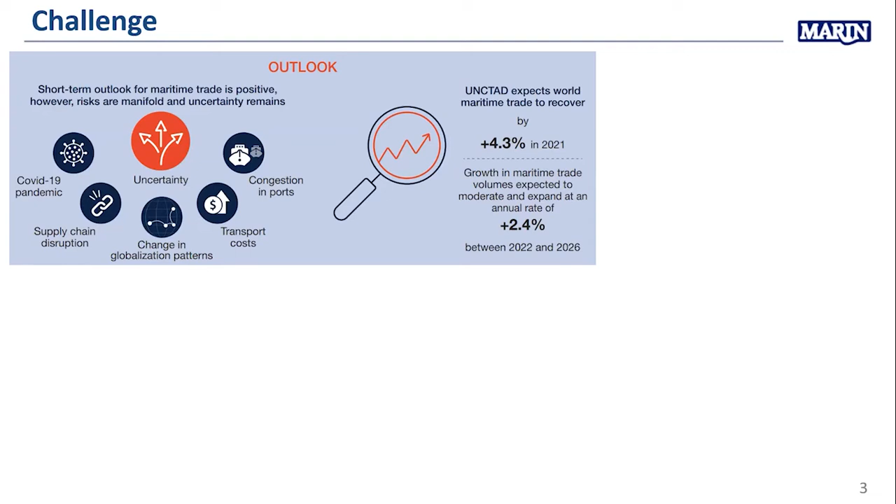And even now, in the latest report published by UNCTAD, we're talking about quite significant freight rates for containers and dry bulk. Obviously not that significant trade for the tanker, for oil, but for container ships and dry bulk, freight is actually coming up.

And at the same time, we remember the challenge about the environmental situation. We have a target from the International Maritime Organization to reduce our greenhouse gas emissions by 50%. That's in less than 30 years. So we should keep in mind that we do have pressure from the environment to do something to make our ships greener, more efficient, and so on.

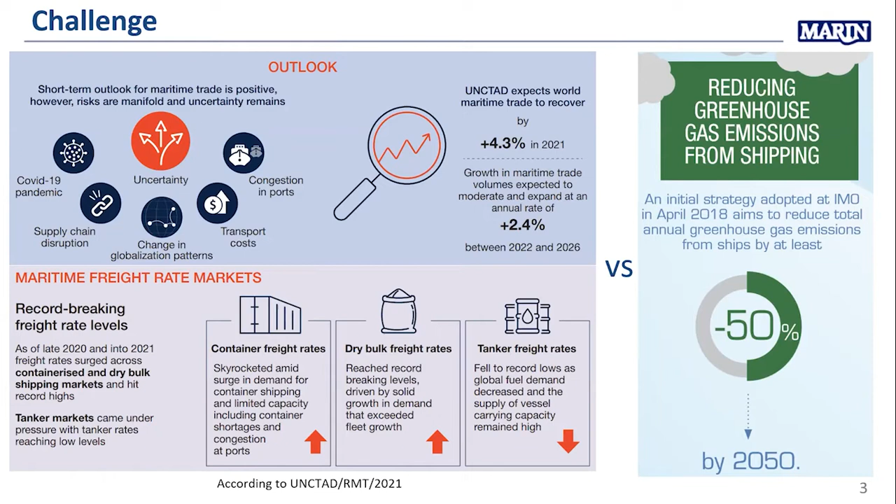This message was also conveyed in the latest ITTC meeting, held in Wuxi, not far from Shanghai, in 2017. Even though the ITTC is a Towing Tank Conference, where model test facilities come together to discuss physical towing tank representations, even in that environment they outlined that they need advanced CFD plus full-scale data in order to make our procedures and recommendations for better ships more and more reliable.

There is development in this area. Just last year, finally, the International Maritime Organization accepted CFD as an alternative to model tests for EEXI calculations. Up until last year, the only measure for efficiency at the pre-design stage was model tests. Everyone knew about CFD, a lot of people relied on it, a lot of people were fascinated by it, but it was not an industry-recognized tool. Now, from last year, we are talking about towing tank and/or numerical calculations. This is a very important step forward.

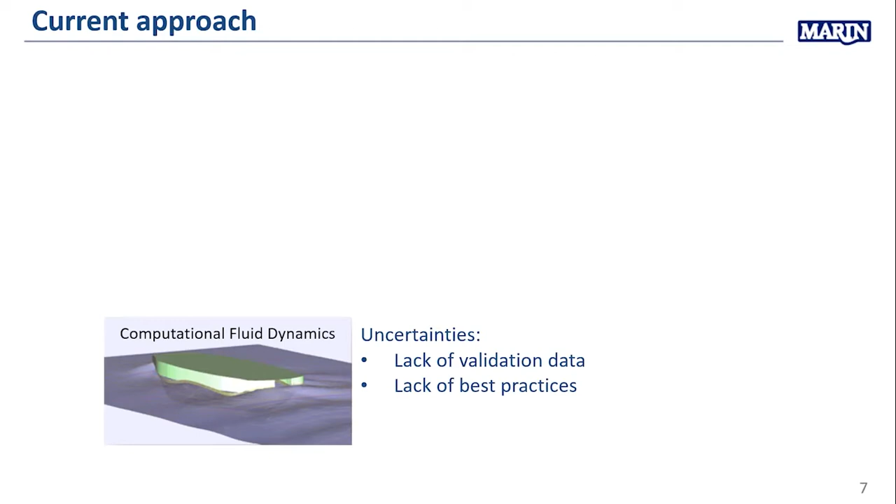Once you do the model test - so usually how it's done - out of the CFD we derive the best possible shape, and we still do the model test for this shape, the more traditional approach of CFD validation. But again, in model test, there are quite a lot of uncertainties.

The scale effect, obviously - you cannot satisfy the Froude number and Reynolds number at the same time. The correlation allowance - every research facility globally uses their own coefficient in order to scale up their model test data.

Another challenge is energy saving devices. Those correlation allowance coefficients mostly work okay-ish for traditional hull forms, but if there is something very unconventional - an energy saving device or weird hull form - those coefficients are actually challenged, and in that case they might not work well for some cases.

And finally, once the vessel is built and we do the full-scale trials, it's still quite a lot of questions - sea state estimation, draft mark readings, hull roughness estimation - not so many people doing that properly. And at the end we still get only one curve, which is the speed and power curve.

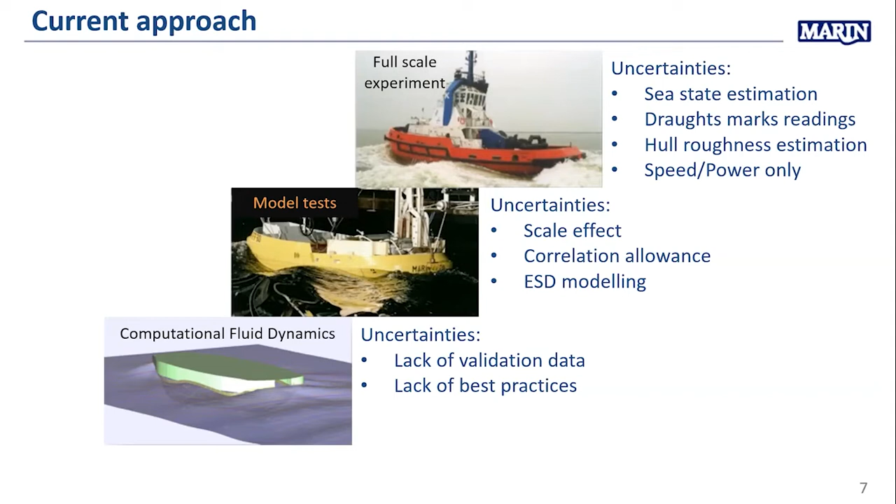So basically we're judging the performance based on only one parameter, which is power. And in power, everything is there - hull efficiency, propeller efficiency, everything is in one single parameter. So this is the technique we are doing now, but at the same time there is some sort of detachment from each other - there's no proper global feedback loop to make this work well.

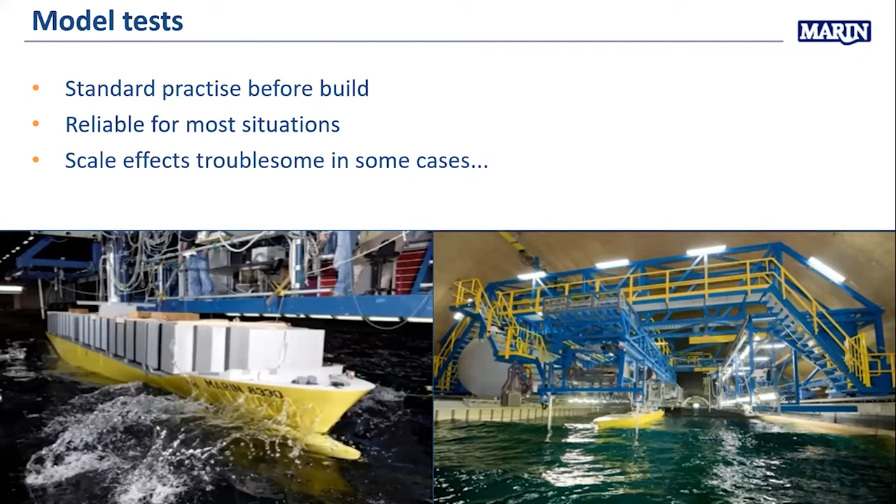Just a couple of slides about the model test, so you know how it actually operates. We build the model of the actual vessel, usually about 6 meters long, this kind of size, and we run this in the towing tanks.

Physical tests - to me, personally, when I was working at Lloyd's Register before and did quite a few sea trials myself, I thought that you can understand the performance of the vessel once you are staying on the deck, or in the engine room, or on the bridge of this vessel. However, there's still quite a lot of uncertainties, and the key ones are winds, waves, current, and so on.

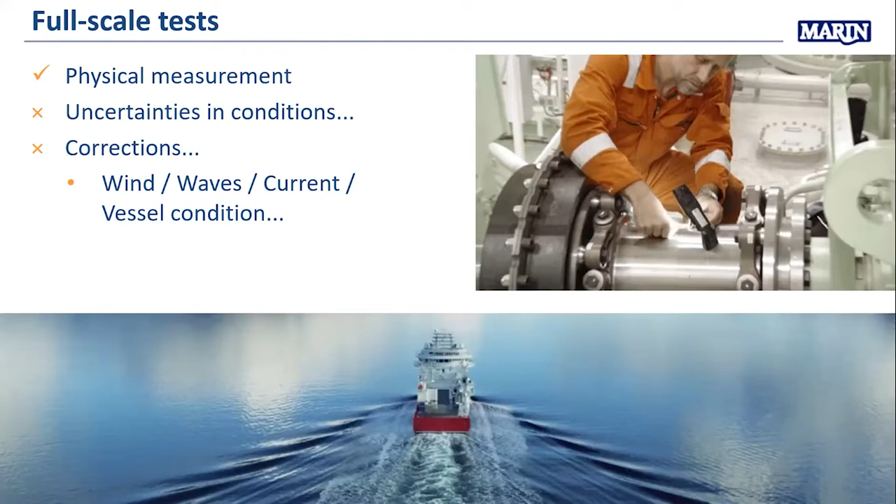Sometimes you're expecting the weather condition would be like that for your trials, and you end up with different conditions. But because the time is allocated for the trials, you have to perform them in that condition. And obviously, your prediction might not be very accurate at all if it's in these conditions.

So there is an industry recognized procedure for the sea trials, ISO 15016. We have to follow this procedure in order to make our trials as accurate as possible.

However, in this procedure there are some interesting bits. The wind and waves can be determined by visual observation from multiple experienced mariners. So if 5 people stay on deck, all 5 of us can check the wave height, and one person says 1 meter, another says 2 meters, a third says 3 meters, but we have to use a single value. Which one? No one knows.

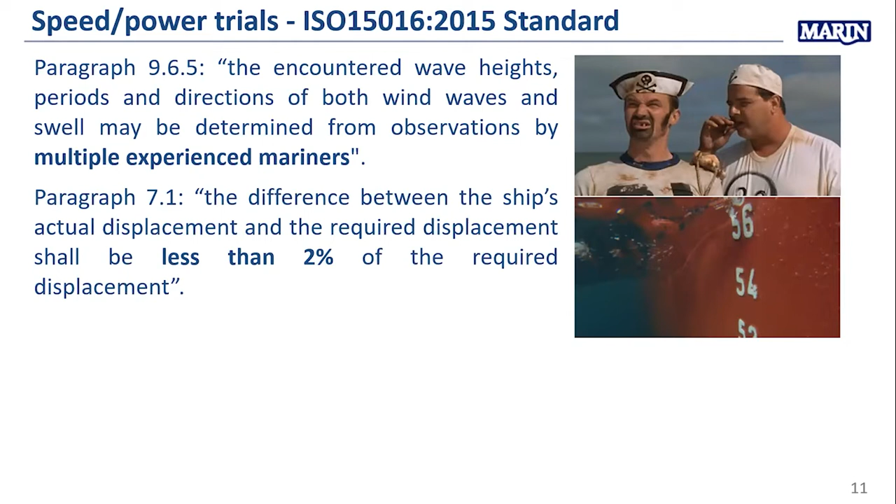Depending on which wave height you put in the spreadsheet, your curve will be different. The second point: the difference between ship displacement should be less than 2%. However, if you're talking about a very large crude carrier or tanker, that 2% is quite a significant displacement. Just talking about resistance, it will give you some deviation on the resistance. Again, it's quite an uncertainty.

And another paragraph, 7.3: if there is roughness, you have to clean the hull as needed. What does that mean, as needed? If I, as a superintendent, see this kind of condition on the hull and say it's fine, it should be all right. However, obviously the resistance of the vessel will be quite significant, right?

So there's a lot of subjective meaning and subjective discussion happening in this procedure, and we have to deal with this somehow. Specifically for EEDI or EEXI, it might be identical vessels, sister ships, built by the same shipyard, but because of these factors the speed power curves will be very different. Which doesn't make sense, because the owner might ask, hold on, I have 2 identical sister ships, how come I have 2 different performance characteristics of them? Doesn't make sense.

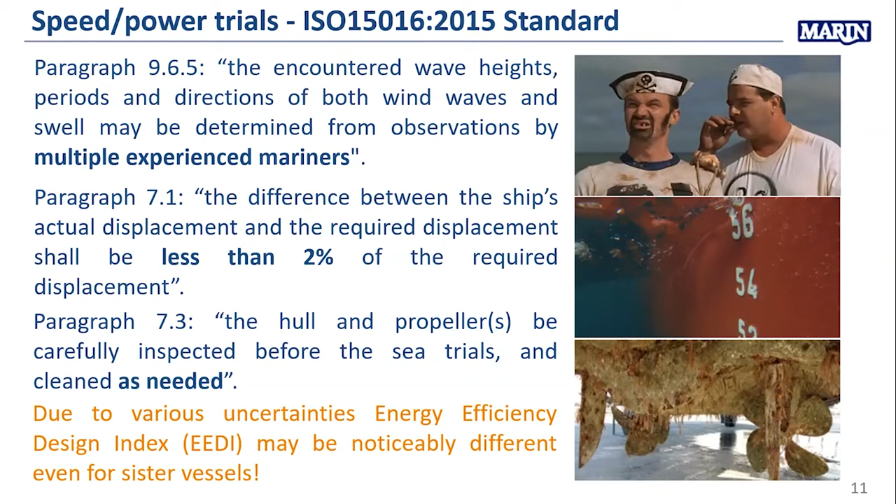CFD - that's probably the only slide I have about CFD. Obviously it's a very good tool, it can offer both scales, and we can dive into what's happening with the flow and so on. But again, for validation, the only data we mostly have is from model tests, which don't take into account the scale effect. So we don't have enough data for full scale validation, and that's the challenge.

This is probably the only publicly available curve at the moment. In 2016 we ran a workshop at Lloyd's Register and asked participants to blindly submit results for the actual ship. It was a general cargo vessel, and the participants did the calculations blindly. Then we came together in a rainy day in Southampton in November 2016 and discussed the results.

You see quite a lot of participants under-predicted the curve, the orange curve, which was actually from the trials. However, some of them were just spot on. So it means there is an opportunity, a possibility to predict the performance accurately if you have the experience and knowledge. That was one of the key outcomes of that workshop.

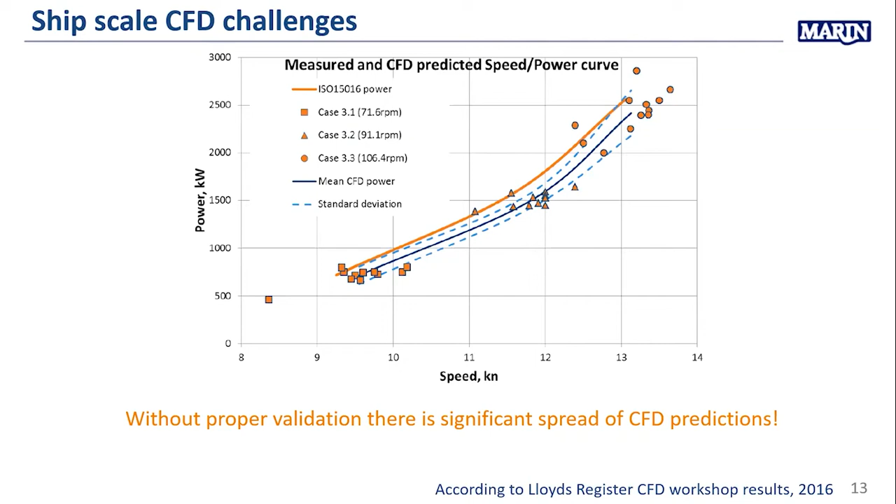Having this in mind, we are working on a global initiative called the JoRes Joint Research Project. This is the largest joint industry project ever run by Marin, the research institute in the Netherlands. Normally a joint industry project has about 15 to 20 participants; here we have more than 40. I'll show you this slide in a minute.

The key point is this project is supported by IMO, the International Maritime Organization, because they said we do need reference cases in order to validate our CFD. For this project we have 3 vessels.

One is already famous, the same vessel we used in the workshop in 2016, the MV Regal, but now we have a quite different set of results, like different measurements, new technologies, and so on. The 2 other vessels are a single screw tanker and a twin screw vessel. The more vessels we have, the better variety of data, and so the better our predictions and validation data will be.

This is the list of participants we have at the moment, and I think it's a very good bunch of companies. You can see there are key shipyards like Samsung, Damen, Hyundai, DSME; research institutes like Marin, HSVA, SSPA; propeller designers like Nakashima; and class societies like Bureau Veritas, Lloyd's Register, and so on. This is exactly what we wanted to bring - different stakeholders with different backgrounds and different ideas, sitting together and developing the benchmarks for future CFD.

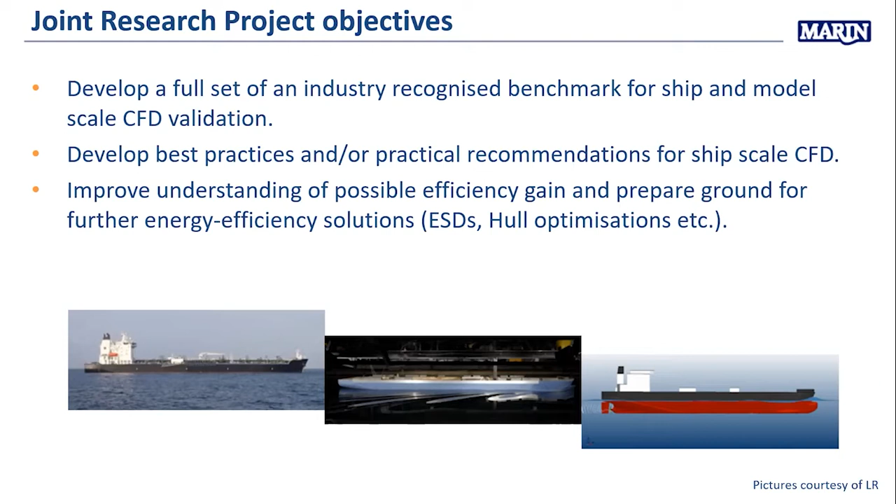That's kind of the message being discussed now at different levels of the maritime business. I don't have too much time to discuss all aspects in detail, but I would like to highlight key points on why this project is very unusual - very different to other projects.

We do 3D laser scans of all our vessels. You might ask why - because usually as designers we do have geometry, right? We have the CAD files, developed in Rhino or whatever, for the propellers, for hulls. So why do you need to spend time and money to do the 3D laser scan?

As you know, they are different. When you order this at Korean shipyards, there are some deviations with the hull, and it might be - I wouldn't say half a meter, but it could be quite a significant deviation. That's why we have to make sure we are calculating the actual vessel that was tested in the trials, with no deviation in the geometry. That's why we do the 3D laser scan for all our vessels.

Roughness - sorry, I'm just holding the microphone, so maybe it was trouble for the online speakers. To be honest, we might open the Pandora's box with roughness, because once you're doing your validation and model tests against Kriso container ship, KVLCC tanker, model test propellers, you don't actually think or care about roughness, because you're just assuming the object, your model, is hydrodynamically smooth.

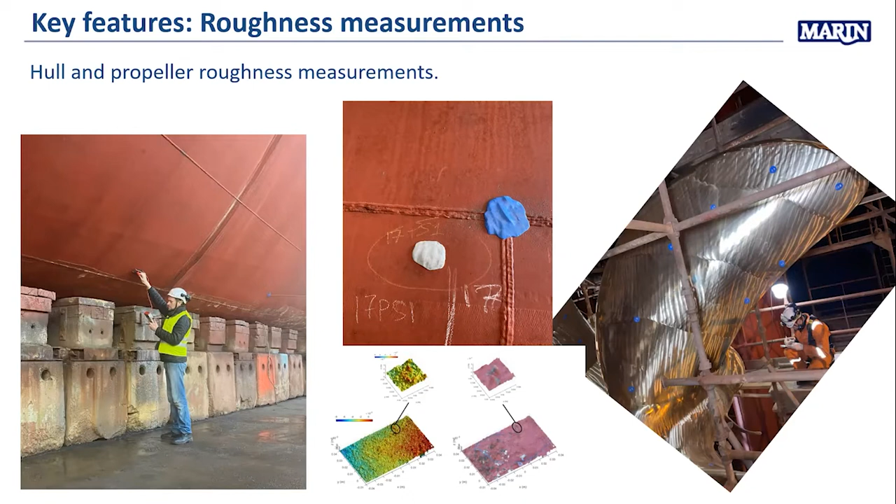Model test. As usually mentioned, the traditional approach is to do the model test first, and then the vessel is built. What typically happens is you do your model test at the conditions you think, draft, speeds, geometry, and so on. But during construction, the vessel might be slightly different and conditions will be different.

And what we see is the trials conditions are never the same as the model test conditions, different drafts, different speeds, and so on. So in this project, we start with the actual trials first. We know exactly the conditions of draft, speeds, everything. Then we replicate these conditions in the towing tanks. And for the towing tank, we don't use the design geometry, we use the 3D laser scan geometry, so it's reverse engineering. We're doing the model tests after the actual trials in order to match and learn more about the scaling effect.

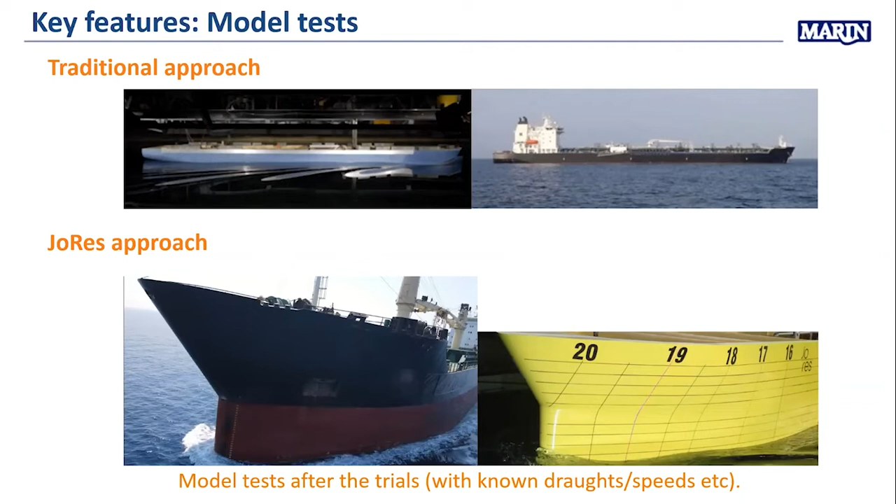Propeller thrust. I mentioned earlier that at the moment the only parameter we're working with is power and propeller torque, which includes hull efficiency, propeller efficiency, everything. In order to find out the difference between them, you have to measure propeller thrust, which is quite tricky because the compression of the shaft line is very minor, like a few microns. You have to determine this in a noisy, highly vibrating engine room.

We're working together with VAF Instruments who developed this TT Sense, and this was applied on a few vessels in our project to measure propeller thrust. Just a fun fact, the accuracy of the sensor is 25 nanometers, equal to 5 seconds of hair growth. So if you count 1, 2, 3, 4, 5, your hair will grow about 25 nanometers, which is the accuracy of the sensor.

Trials. I mentioned the ISO 15016 standard, an industry recognized standard, but still quite vague. Here we do more, because for our purposes, for CFD validation, we need to be on the safe side. We need to look deeper with a higher level of accuracy, specifically selecting very good weather conditions, making sure there are no waves, no significant winds, and so on.

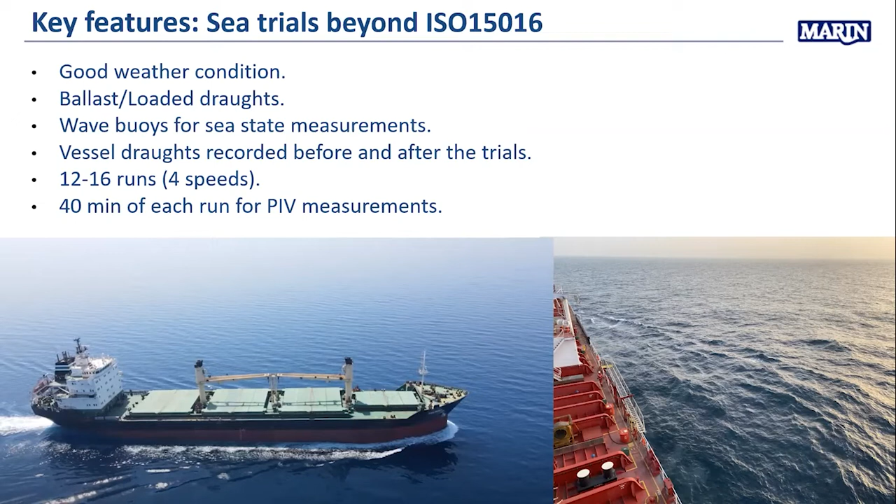We usually do quite a lot of runs, because according to the ISO standard it should be 3-4 reciprocal runs, so about 8. We usually do either 12 or 16 to increase confidence in our runs. And once we do the PIV measurements, we increase the duration further. Usually according to standard it should be 10 minutes, we do it for 40 minutes. Have you heard about PIV?

Particle image velocimetry. So basically, apart from measuring propeller torque, which gives us power, we would like to know what's actually happening next to the propeller, what kind of flow, and how this flow interacts with the propeller and the hull. To do that, we developed a special tool.

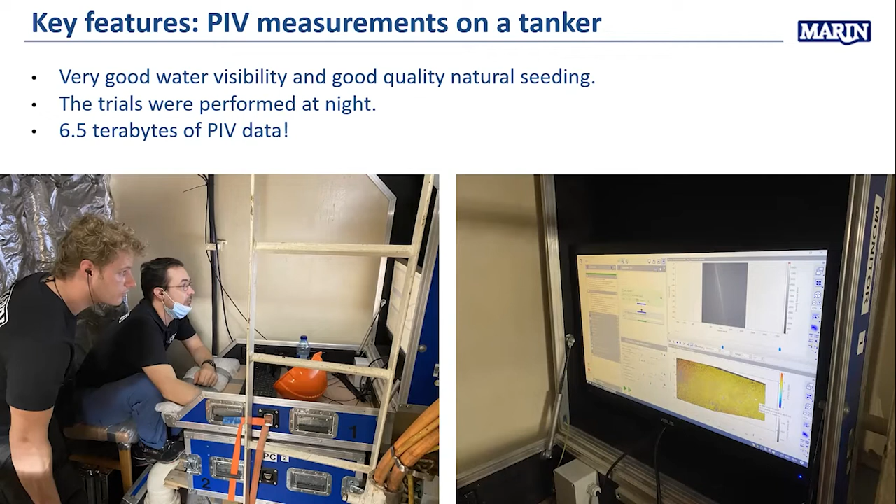Then there's the CFD part. Mark and Hrvoje were involved in this, and I really appreciate their contribution. We're doing quite a lot of interesting studies with CFD, about grid-dependent studies, thrust validation, and roughness analysis. So it's quite a lot happening in this area as well.

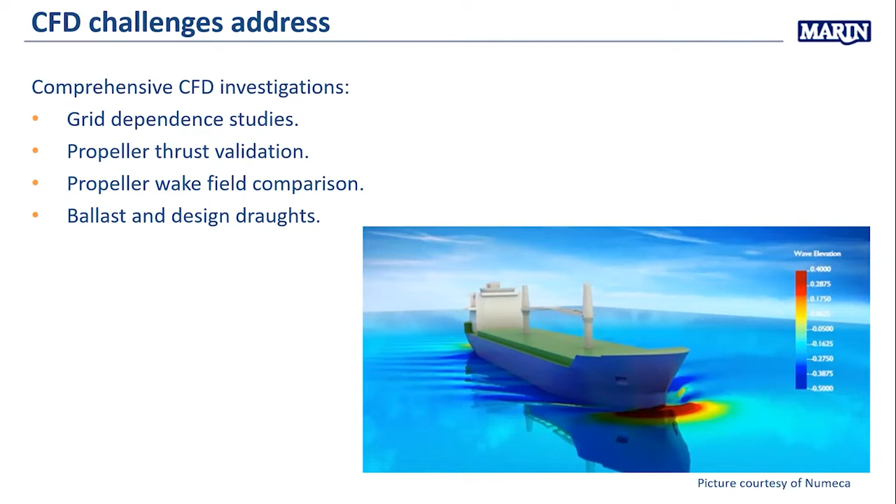So the key message — if you go outside and later someone asks what's the key message of this presentation, what did you learn — the key message is like that.

Once you do the model tests, in this project we do the model test after the trial, so we do the reverse engineering, and we do it in different facilities. If someone is doing something wrong, we don't repeat this error again, because we do it in different facilities. One model test was in Norway, another was in China, with the same model by the way.

For CFD, we have the validation data development, and we're developing the best practices for how to run CFD with the highest possible standard.

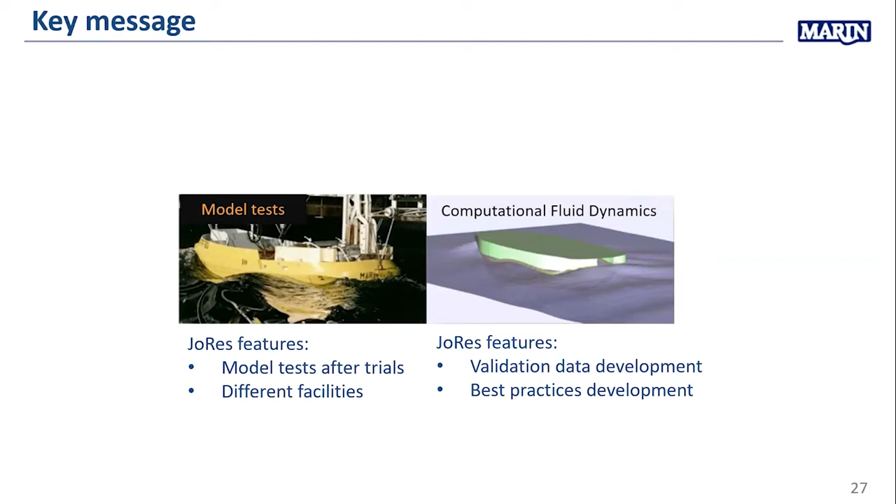And for full-scale experiments, we have sea-state assessment with a buoy, accurate draft measurements, thrust measurements of the actual vessels, and PIV measurements of the flow. Most importantly, this is looped — we do this for the same geometry, the same conditions. So now you have the opportunity to cross-check and learn, because unfortunately none of these methods are 100% accurate. You have to fuse all of them in order to better understand the reality.

And the concluding remarks: here we're doing industry-recognized benchmarks for CFD validation. That's probably why it's important for this audience, because we need the real data — the actual roughness data, the actual measurements of the vessel, on the vessel, from the vessel — in order to validate our CFD. This creates the opportunity to learn more about energy efficiency. Maybe with this kind of validation data set, in a few years we develop a completely new hull form, or a new propeller, or an energy-saving device which gives quite a good gain for energy efficiency.

Just one example: in 2015, a group of researchers from GL — the German class society, well now it's the Norwegian-German class society — made an interesting study. They took an initial hull form and used artificial intelligence to run an optimization process for the hull form, for I think a few specific speeds. They ran 37,000 iterations, considering 37,000 hull forms in order to get the best result, and ended up with a final hull geometry.

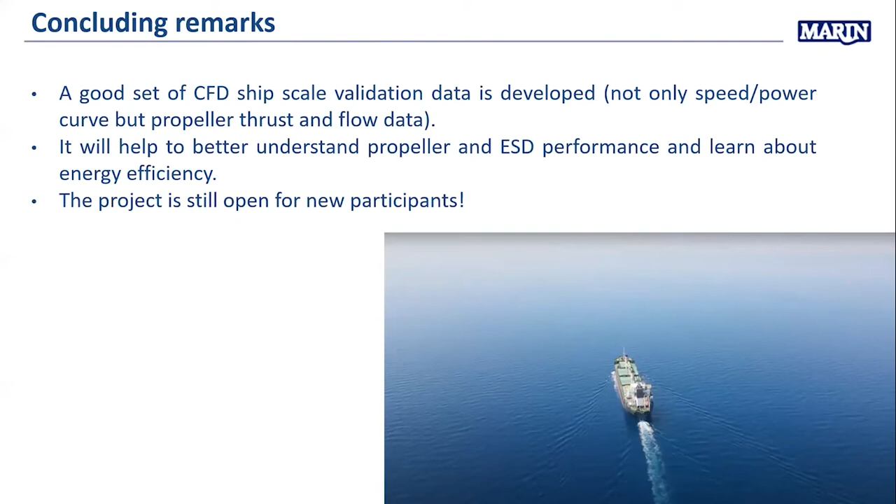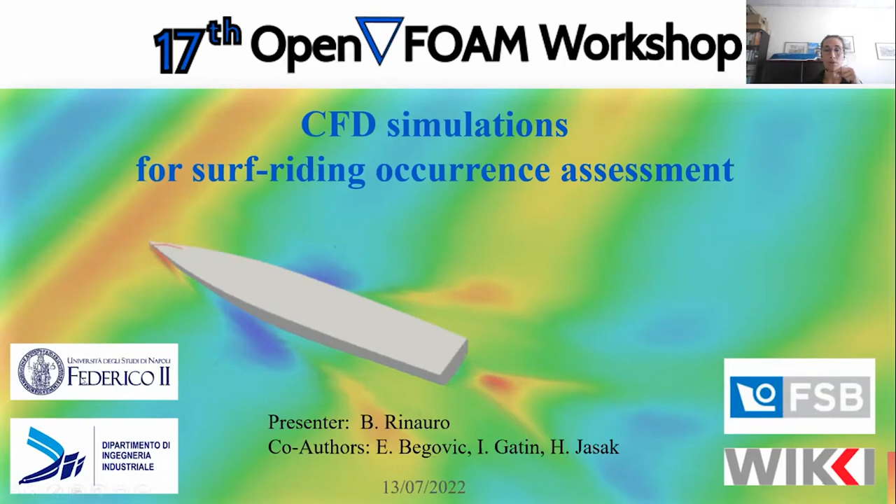I will first describe the physics of the phenomena, which has been studied first with a one-DOF mathematical model. Then I will describe the set of CFD simulations, concluding with results and discussion.

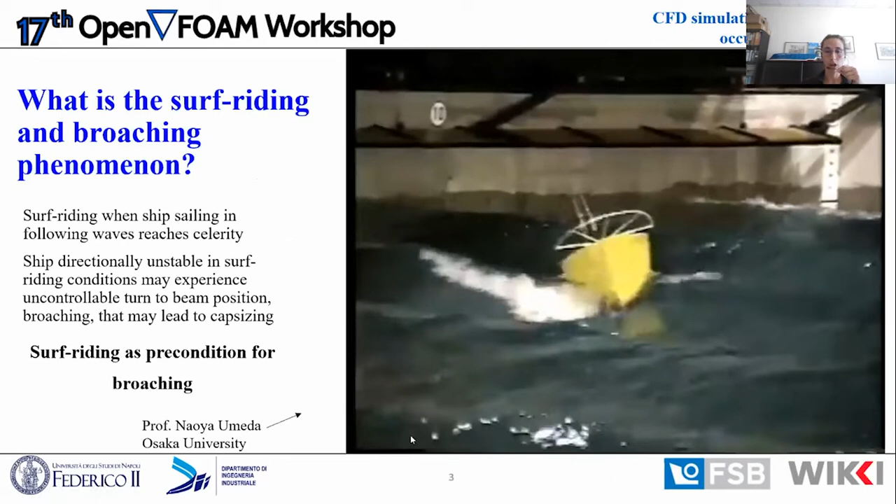So what is surf riding and broaching phenomena? Surf riding occurs when a ship is sailing in following to quartering waves, with ship speed lower than wave celerity. In this condition, the ship may be caught by the wave and start sailing with the same speed as wave celerity. In this condition, surf riding equilibrium occurs.

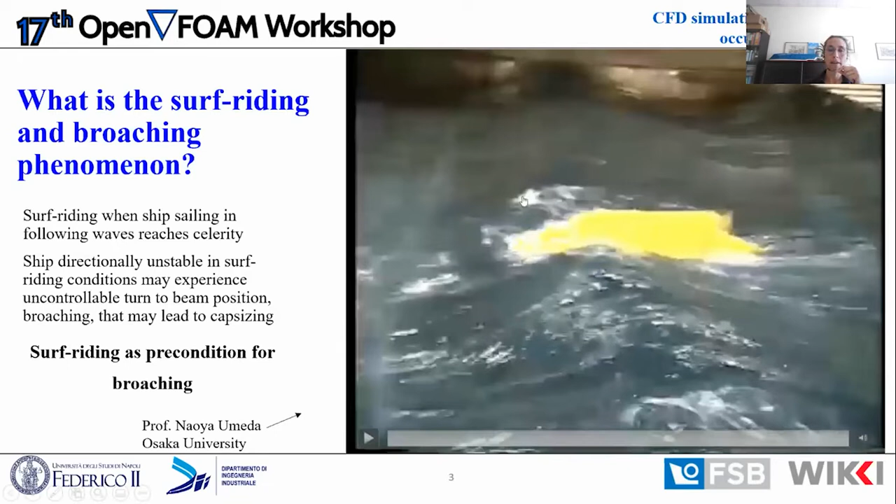In this condition, the ship is directionally unstable, and an uncontrollable turn to beam position may occur, which is called broaching, which may lead to capsize. Since surf riding is a precondition for broaching, which has more complex dynamics, surf riding study is used to detect broaching vulnerability.

The physical phenomena of surf riding can first be schematized with a one-DOF surge motion equation in regular waves. The equation considers the equilibrium of the forces acting on the ship in the forward speed direction. The forces are the resistance, the thrust, and the wave force.

The surf riding equilibrium is reached when the difference between the resistance and thrust reaches equilibrium with the wave surging force. The resistance and thrust is represented by the green curve, while the wave surging force is represented by the red sinusoidal curve.

During the surf riding equilibrium, two types of equilibrium may exist: stable equilibrium when the wave trough is at midship, and unstable equilibrium when the wave crest is at midship.

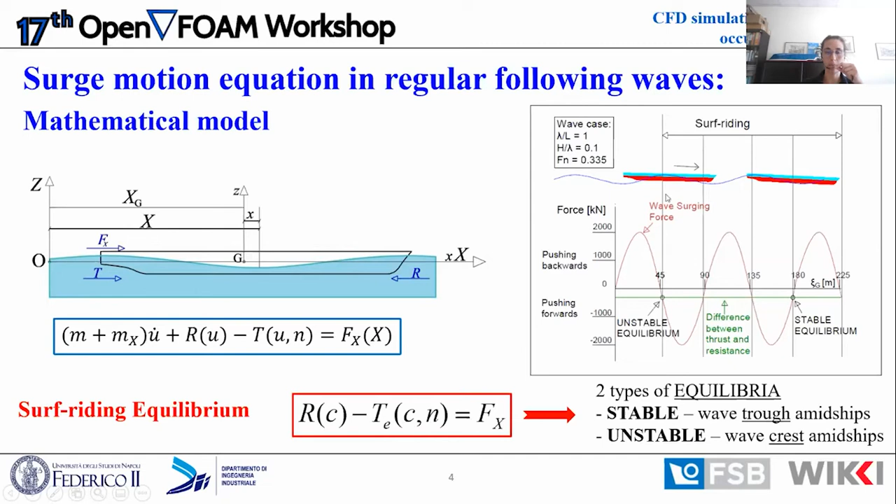The solution for surge displacement and surge velocity made it possible to create a phase plane representation, along with the calculation of the stable manifolds.

Two conditions have been identified. The first is when surf riding is between the first and second threshold. In this case, depending on initial conditions, both surging or surf riding motions are possible, and the surf riding motions are delimited in the domain defined by the stable manifolds.

The second condition is surf riding over the second threshold. In this case, whatever the initial condition, the only possible motion is the surf riding equilibrium.

The change in system behavior in this case has been obtained by increasing the wave height, but other control parameters to observe the system behavior changing are the propeller number of revolutions and the wavelength.

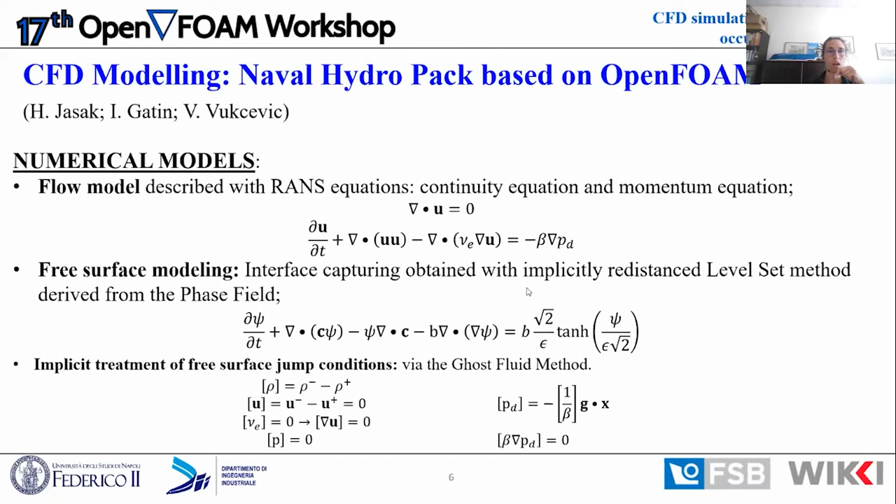The wave modeling is obtained through a double decomposition: a solution decomposition achieved via SWENSE method, which decomposes the wave field into incident and perturbated components, and a domain decomposition achieved via relaxation zone, an implicit approach which forces the generated perturbated field to vanish in the far field boundaries.

The partial nonlinear differential equations are discretized by the finite volume method in two steps: a solution domain discretization divided in time and in space, and an equation discretization which requires that the governing equations in integral form are satisfied over the control volume around a center point.

Finally, the turbulence closure is achieved via two equation eddy viscosity models described as the K-omega shear stress transport model.

Together with the numerical models, the physical models were the hydromechanic couplings, which combines the fluid dynamics and mechanical rigid body motion. The wave field was described by the linear wave theory, since only regular waves were simulated.

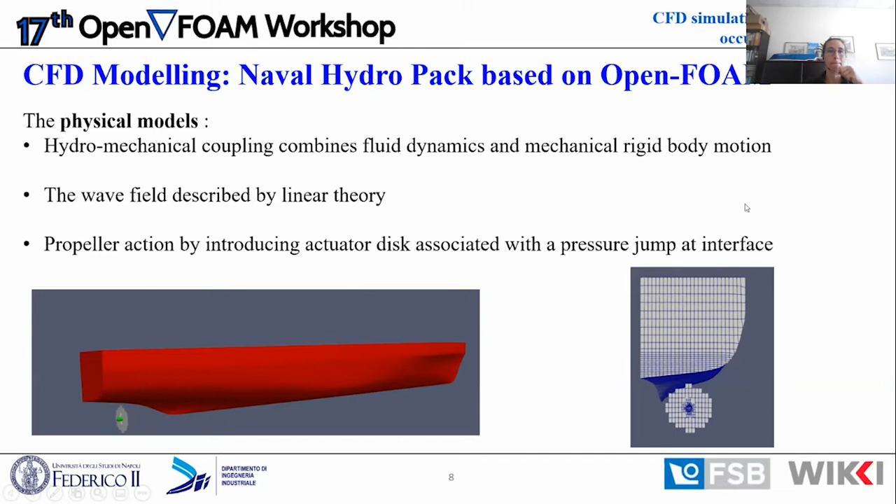Surf-riding occurrence has been studied for this parent hull of the systematic series D by Kracht and Jacobsen. The CFD simulations have been carried out at full scale, and the hull was scaled at 90 meters length.

The simulations were carried out considering only half of the domain, since the motion is symmetrical.

The first set of simulations were carried out in calm water self-propulsion conditions in order to validate the setup of the simulations. Therefore, the ship was free to heave and pitch, and resistance and thrust values were analyzed and compared with experimental data available.

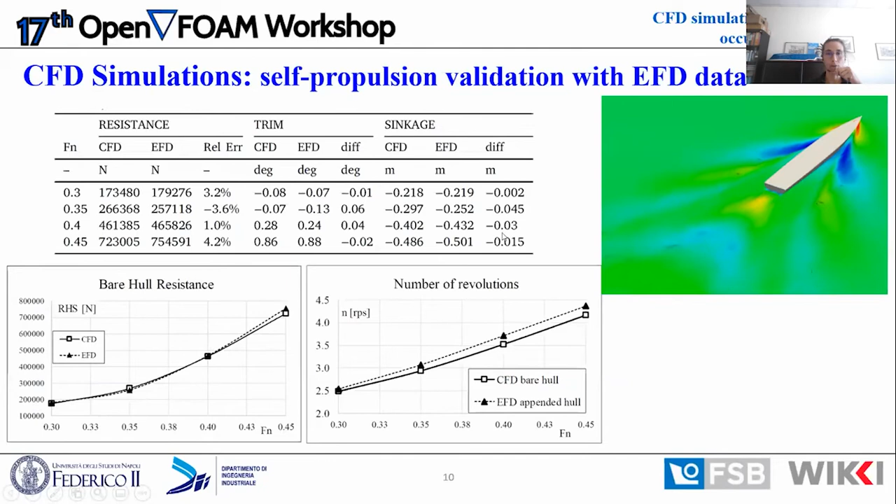From the graphs, we can see that the two approaches are in good agreement. Therefore, once the setup was validated, simulations in regular following waves were performed.

Although CFD simulations are time-consuming, especially in surf-riding conditions when the encounter periods are very long since encounter frequency tends to zero, the advantage of CFD simulation is that the physical phenomena can be studied with great precision and analyzed in different aspects.

In fact, to observe and identify the surf-riding equilibrium, we used different approaches. The first approach was to identify and observe the motion of the ship in waves.

In this case, simulations were run with 3 degrees of freedom. The ship was free to surge, heave, and pitch.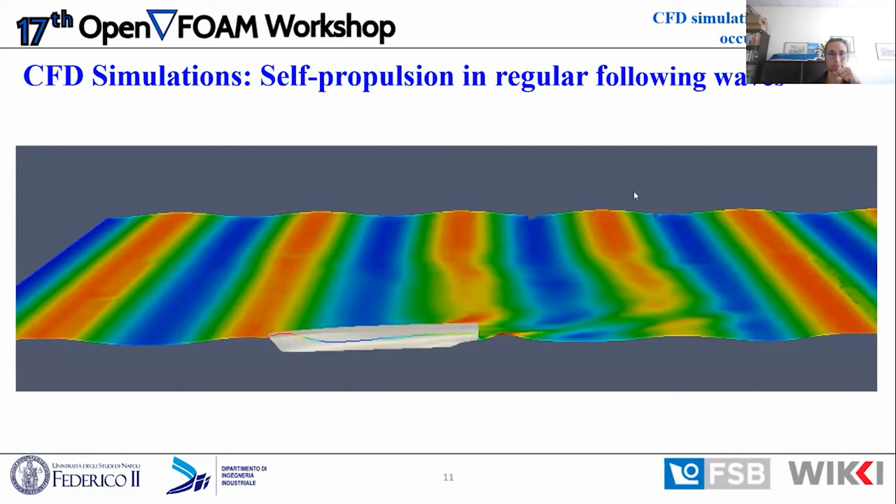Another approach to identify surf-riding equilibrium was through the study of the tendency of the velocity. If the ship speed, the blue line, oscillated in time, surging condition was identified. When the ship speed reached the wave celerity and continued with the same value, surf-riding equilibrium was observed.

Another approach was analyzing the phase plane. In fact, in surf-riding equilibrium, we can see that the phase plane trajectories tend to a fixed point.

Moreover, through the analysis of the variation of the forces, we could identify surge motion when the forces oscillated in time, and surf-riding equilibrium when the force reached a constant value and went to the equilibrium.

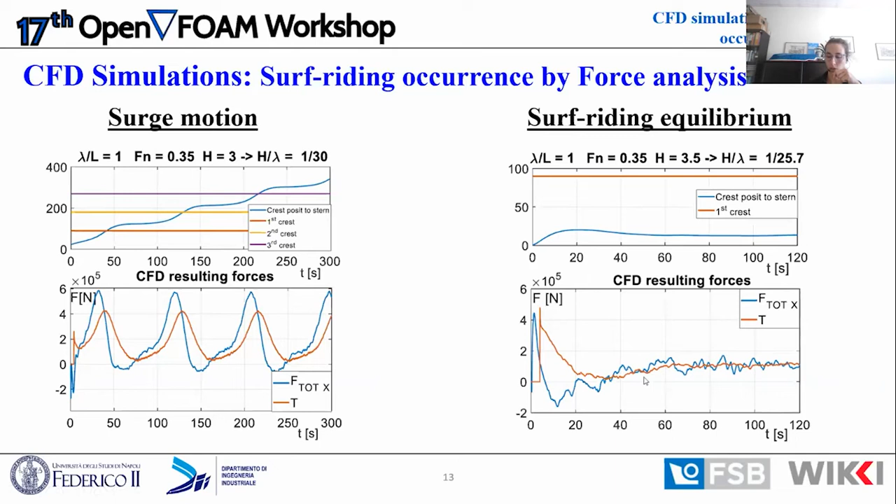So, in order to have a comparison between the forces obtained by the 1-DOF model and the CFD modeling, we performed a decomposition of forces. While the 1-DOF mathematical model has resistance, thrust, and wave force separated in its development, the dynamic equilibrium of the surf-riding simulation is given by the inertial force, the total force in the x direction, and the propeller thrust.

In this case, the total force in the x direction includes both the total resistance in waves, the added resistance, added inertial moment, and the wave force. In order to have a fair comparison between the forces, the total resistance in waves has been obtained by subtracting from the total force in the x direction the wave force, which has been calculated by Hydrostar, a 3D potential code.

Therefore, resistance and thrust forces have been compared. The differences we see between the resistance curves are due to the fact that CFD includes the added resistance due to wave, while the 1-DOF approach considers only calm water resistance. The difference may also be attributed to the variation of the wetted surface and wave force changes under the actual wave profile, which is only considered in the CFD simulations.

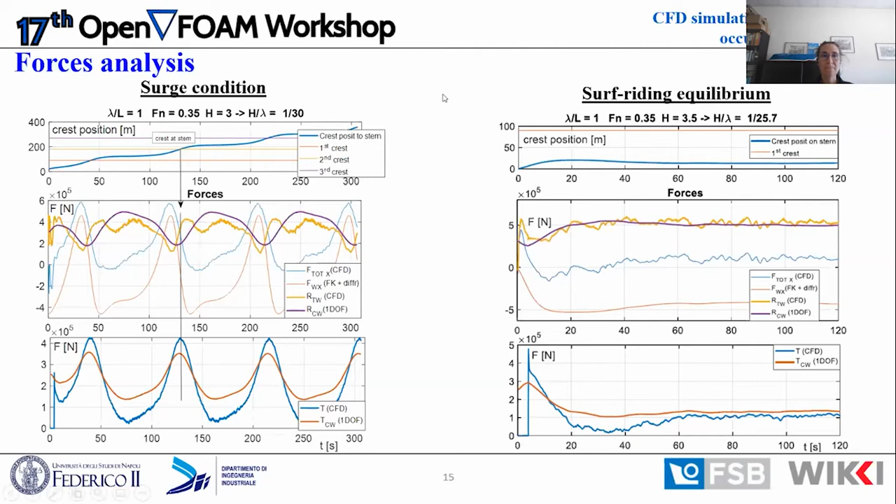So as a result, we compared the 1-DOF limits with the occurrence of surf riding in CFD simulations. In this framework, the 1-DOF approach has been used as a primary tool to define starting setup case and starting points from which CFD simulations have then been performed. The cases ran were with wavelength similar to the ship length, with Froude numbers from 0.3 to the service speed, and with increasing wave heights.

We can see that 1-DOF limits defined by these curves are more conservative, since surf riding occurrence in CFD simulations appears at higher wave heights. This is due to the fact that CFD simulations include all the non-linearities not included in the 1-DOF approach.

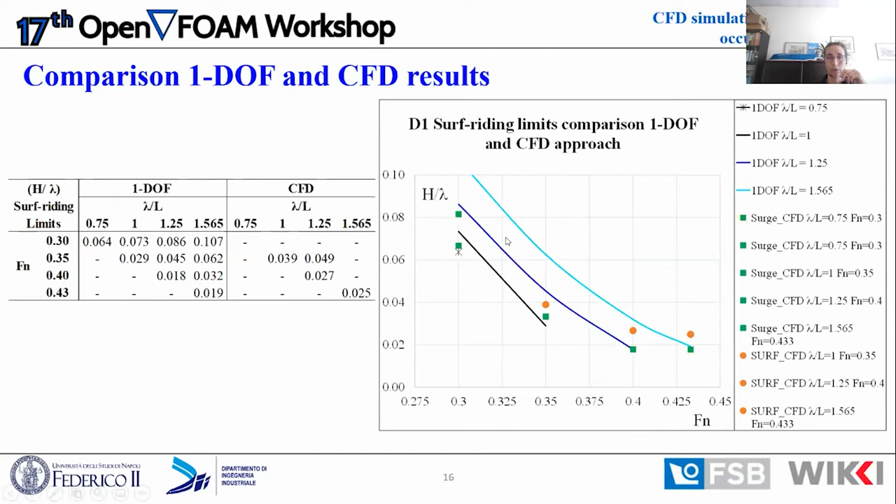It is worth underlining that for wavelength lower than ship length, no surf riding has been observed in CFD simulations up to wave heights equal to 5.5 meters. This can be explained by analyzing the dynamic pressure distribution around the hull. We can see that for wavelength smaller than ship length, the pressure at the bow is greater, which induces greater resistance and less likelihood of surf riding equilibrium.

Concluding this talk, this work presents the application of CFD simulations for the study of a complex phenomenon, which is surf riding. After a preliminary study done by the 1-DOF approach, which is more conservative but very fast, with CFD simulations we had the possibility to study the phenomenon in all its complexity, considering all the non-linearities due to the waves and the hull-water interactions.

And it was possible to analyze the phenomenon from different points of view, analyzing the forces, the velocity, the motions, and the pressure distribution. Last but not least, from time series obtained from CFD simulations, phase planes have been reconstructed to identify surf riding equilibrium in the same manner as the 1-DOF approach does.

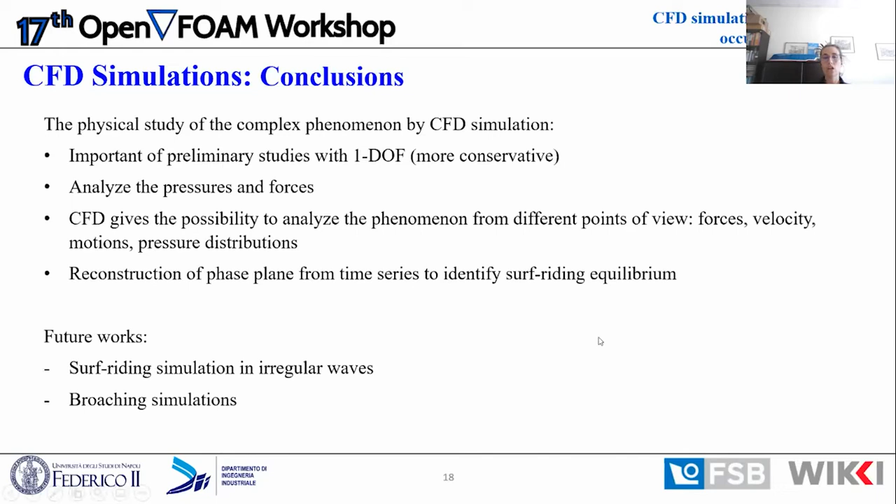For future work, we aim to simulate surf riding equilibrium and surf riding occurrence in irregular waves, getting closer to reality, and to carry out simulations in 6 degrees of freedom to observe the broaching phenomenon too. Thank you for your attention.

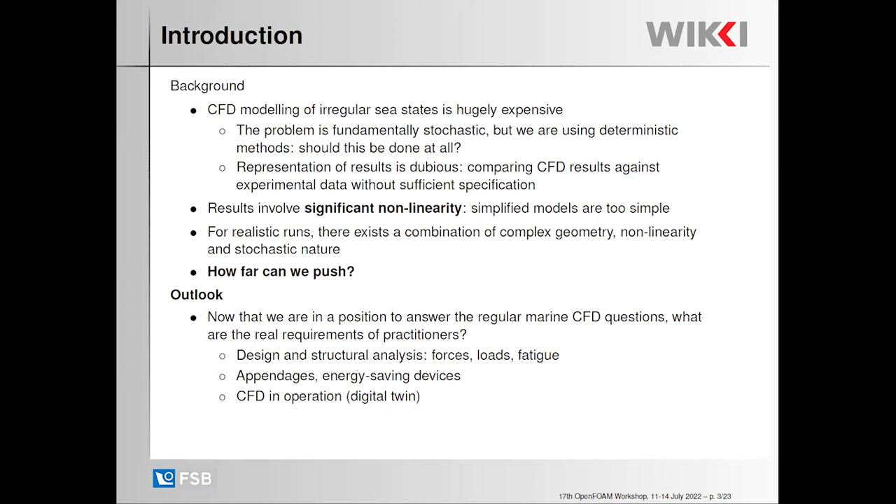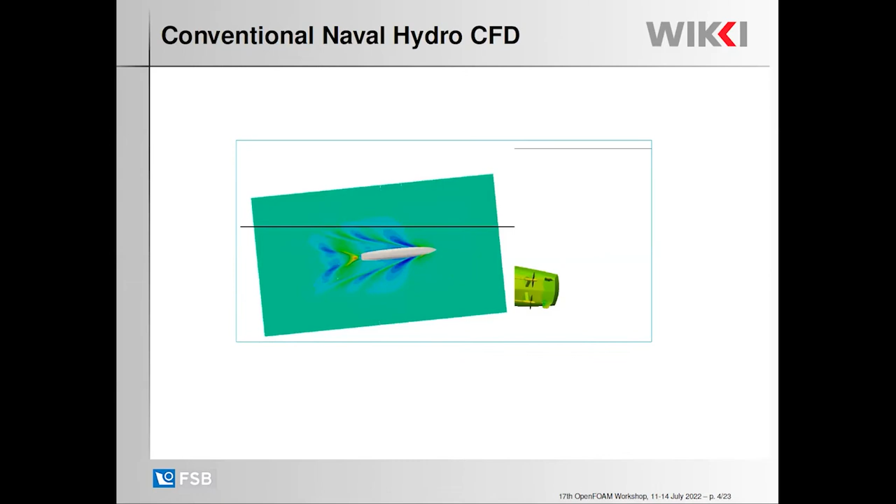And when you speak to the actual ship builders, they don't care. They have a different set of problems, which is what we are talking about. So let me just show you a few movies of what real naval hydrodynamic CFD looks like.

So the first thing is, there is no flat seas, there are waves. And here is one of those simulations of what the ship is doing in waves. And you will see that this is quite a big mess.

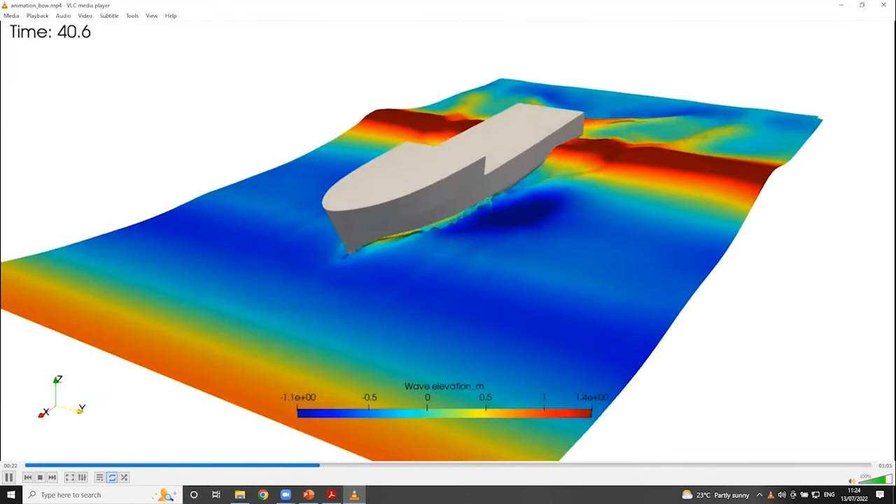You will also notice that my ship has got a bulb, and the bulb was designed for calm seas. Is this bulb doing what it's supposed to be doing here? Is it reducing resistance? How does the effect of the bulb change with variation of the parameters? All of these things are questions that we need to answer.

So the next one that I have is the one that I tried to show yesterday, and it is about spray rails on a full-size model. If you look here, there will be a sort of bump in the form of the hull, and the idea is that you don't get droplets flying into the air, but actually rolling over.

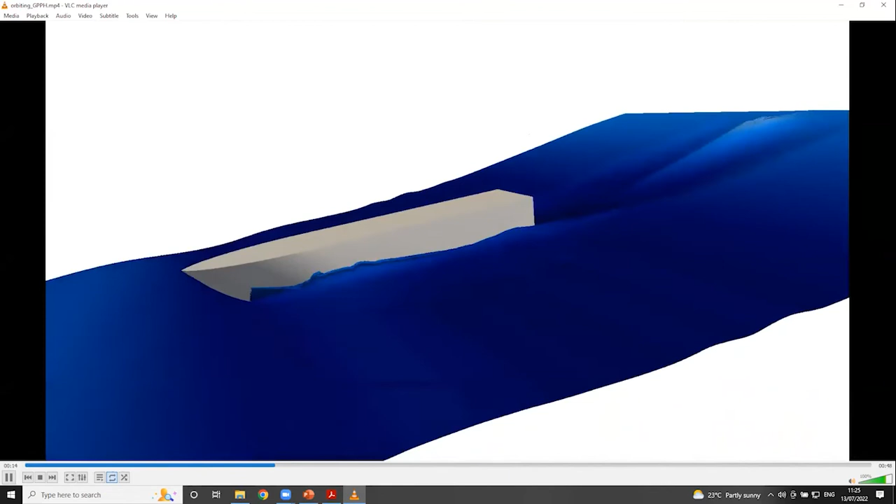This is one of the improvements that we can do with CFD, because in a model, you're going to have a model scale simulation, and capturing the effect of the spray rail is not that easy. So if you take conventional ship models in a conventional towing tank, water will be flying everywhere.

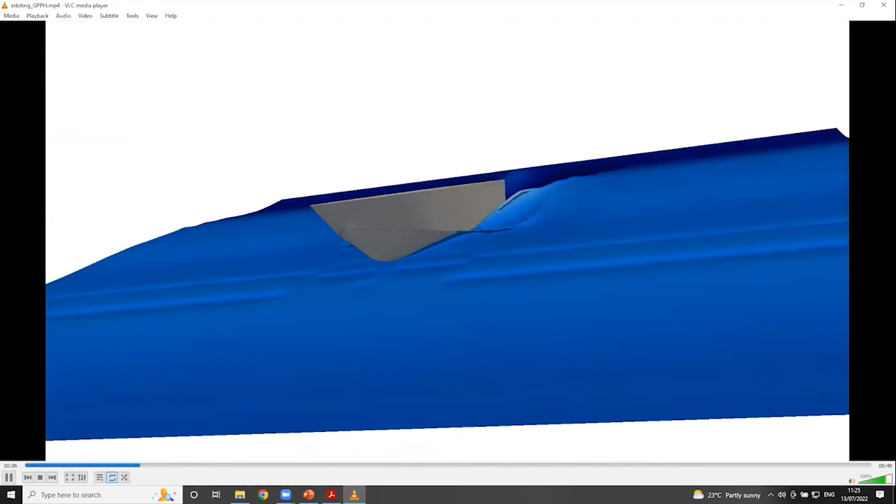So this is one of the reasons why we should be doing full-scale CFD, and this one is different from the previous one because the hull is in the planing condition, meaning that the pressure is holding it outside, which caused quite a lot of problems.

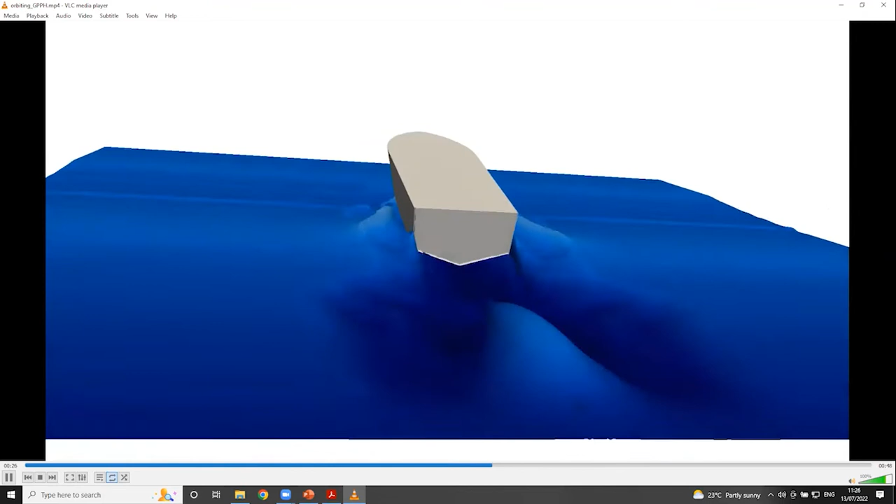For those of you who are experts in naval hydrodynamics CFD, in this simulation, we don't have problems with ventilation and other issues like that, because it took us a few years of CFD experience to learn how to make sure that the ship sails in the water and you don't get air under the hull.

Now, the third one is very instructive because both of these two first hulls are really beautiful hydrodynamic shapes. And look at this one. Okay, so this is a roll-on, roll-off car carrier, and the bow wave doesn't look pretty.

In fact, this is the real requirement, because we are sailing a ship with a big hydrodynamic free surface instability in front of it, but this is the form that people are designing and sailing, and as you can see, it is nowhere near hydrodynamically efficient.

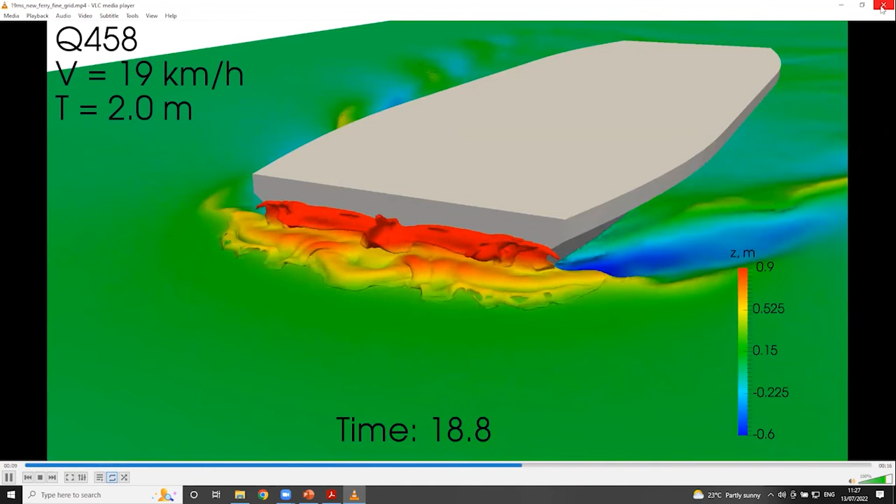So I'm hoping that one of the optimization procedures that Dmitriy mentioned earlier can tidy this one up. This is sort of 1.5 generation beyond the things we have been doing so far, because suddenly we are doing full-scale ships. We are doing things that are not hydrodynamically optimized. We are doing waves, and we are doing secondary effects. And we are also worrying about issues like surface roughness, etc.

Okay, so the next set of results really comes from Sanyo's work, and it is to do with propulsion. One of the problems with propulsion is the difference in timescales. So you're going to have a rotating propeller with tip vortices, with turbulence effects, etc., hitting the rudder, which here is still missing. And we have to worry not only about the efficiency of what this assembly does, but also about vibrations and loads that will happen there.

So the kind of data that we want to get from CFD looks like this. This is the propeller plane velocity contours. And as you can see, this influences your propeller performance. In other words, this is where the money is.

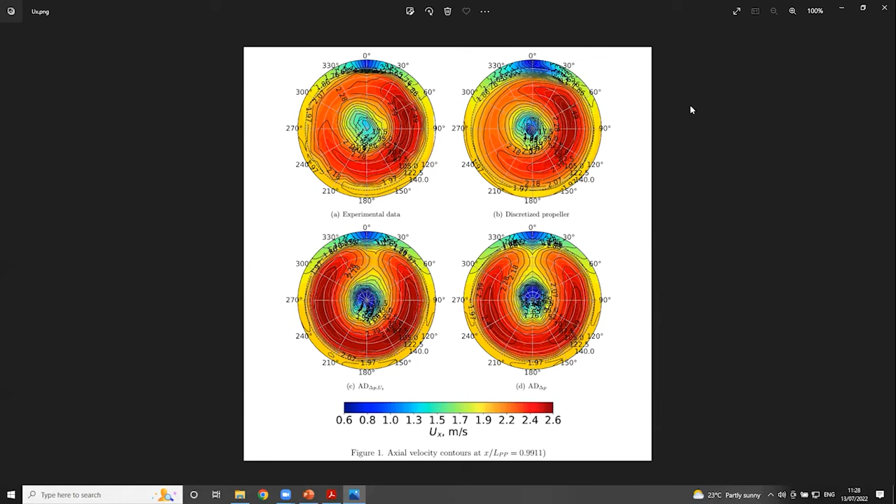This is the efficiency part of the job, and we have to be able to deal with this kind of simulation. But at the same time, I want to know how the ship behaves in waves. And that's not trivial at all.

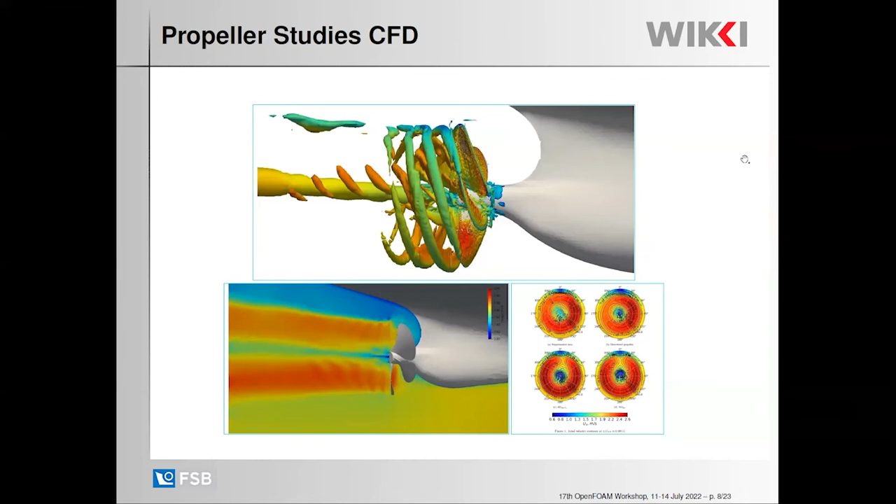Now, on top of all of this, I'm going to show you one piece of what Andro Bakica has been doing, related to energy-saving devices. The idea is that you put pieces of hardware upstream of your propeller, in the wake region of your ship, to improve the flow field hitting the propeller. Here's an example of what this looks like. As you can see, there are 3 fins that are not uniformly set up in space as you'd expect, because the propeller has got an orientation.

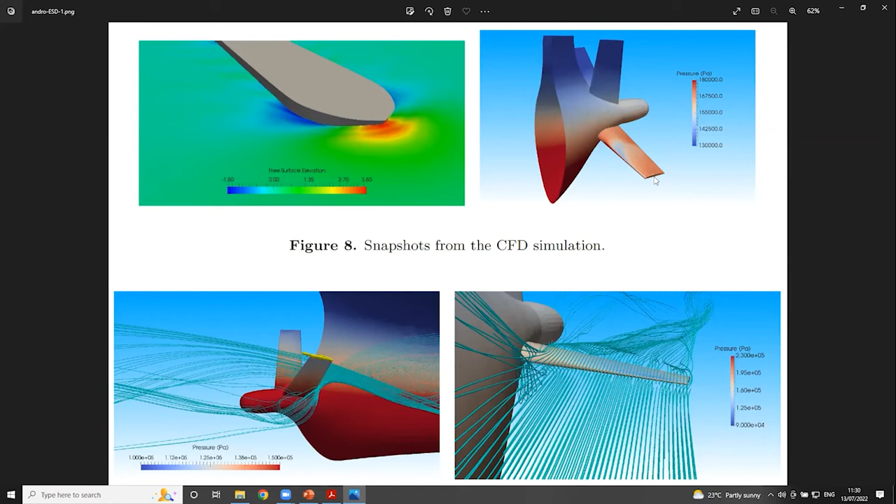The second thing is, try to think about the scales. If this is a full-size ship, this propeller is going to be 9 meters in diameter, which means you have a good 3-4 meter thin fin sticking out into the water right in front of the propeller. Dmitry, correct me, but the power being submitted via the propeller to the water will be 15, 20, 30 megawatts. So this is a very serious fluid-solid interaction problem, because the console has got a relatively low natural frequency, and you have to make sure you don't excite it close to its natural frequency, because it's going to break off.

So on top of what we were capable of doing before, now we have to include energy-saving devices, full propeller geometries or simplified propeller geometries. And on top of all that, we need to calculate the fluid-solid interaction between the components. Wow, this is a serious job.

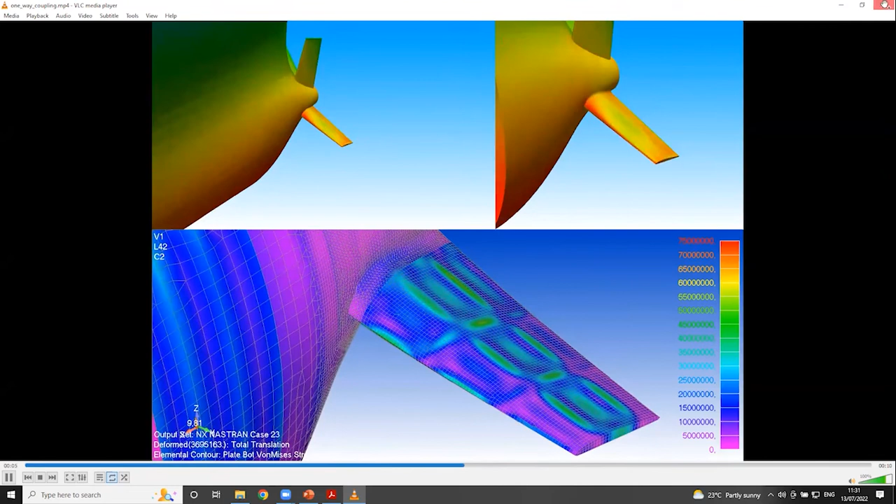So what you can see here at the bottom is the coupled fluid-solid interaction between the vortices caused by the flow we need to have here because of the energy-saving device, and the stress loading—I think this is the von Mises stress—in the material structural model of the energy-saving device itself. Keep in mind this thing is about 3 meters long, and it's not a solid piece of metal. It will have an internal structure with ribs, etc. And it is being excited by the flow field, which involves vortices rolling off of the energy-saving device, and then going into the propeller plane, which is where I want to optimize the flow.

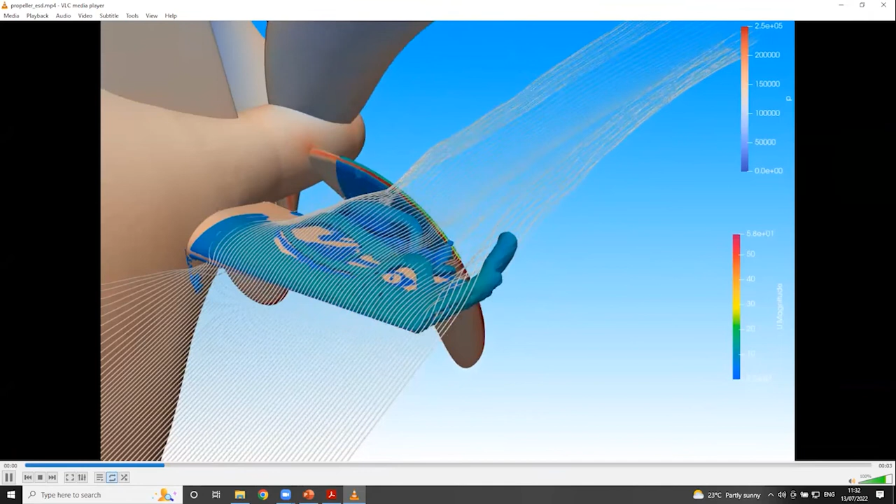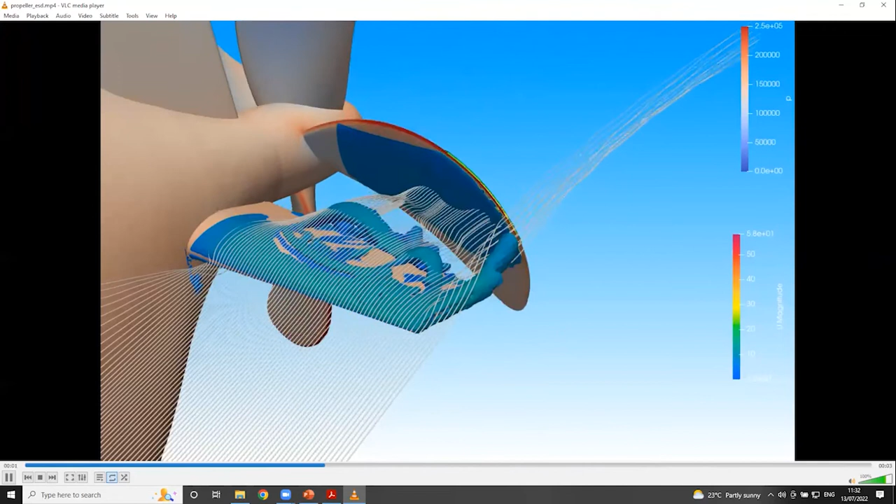Based on all this, I'd much rather do external aerodynamics around a car, because that's such an easy life compared to this. Let me give you one more level of complexity. You have a 3 meter long console sitting in front of the propeller, which is submitting 15 megawatts of power to the water. The propeller is rotating, at model scale, about 12 revolutions per second; here it's going to be about 100 RPM. You carefully worry about the natural frequency of the ESD being away from the natural frequency of the rotation of the propeller. Then you hit one of those waves from Barbara, and the ship goes boom. What's the natural frequency of that? In fact, there's a lot of parameters we have to worry about in this sort of simulation.

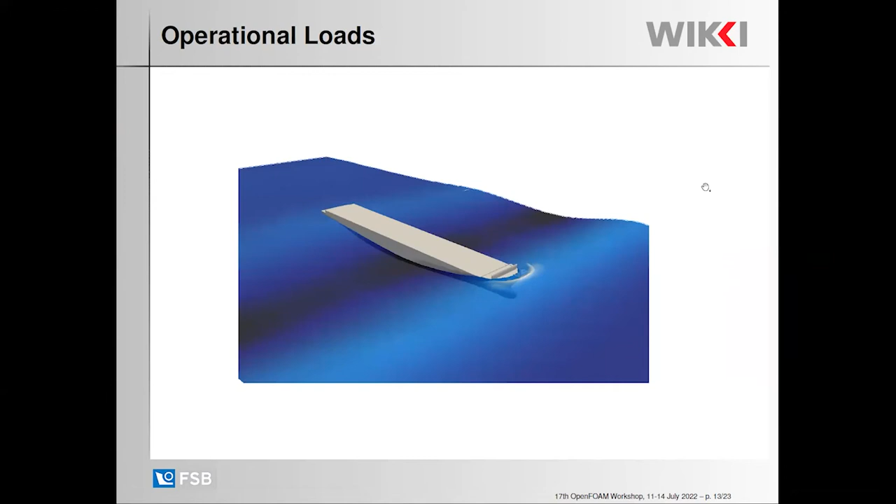So let me get to the last point, which is going to take a bit of time, and that is the operational load. Imagine we have a perfect naval hydrodynamic CFD code that you can perfectly trust, and I want to calculate a load on my ship structure—in this case, that little piece of ship structure up here, which is the breakwater protecting the containers on the ship.

This one is called Skybench. Look at the size of it: 400 meters, 383 meters, and 212,000 tons of weight. A ship like that will have about 20,000 containers on it. And what you're going to do is put it into the waves.

A piece of advice from the people in the know: when this ship is 30 years old, you don't want to be on it. The reason is that, unlike ships that are 50 years old, the lifetime of this ship is limited by the fatigue loading. So I need to calculate what the fatigue load is going to be on a ship like this.

And I have the tool with which I assume I can calculate the stress of a ship in waves. Yes, but which wave?

The ship is going to be hit by about 1,000 waves in a 3-hour storm simulation. Over its 30-year lifetime, I cannot tell which waves are going to do damage. What I can tell is when Dmitriy gives me perfect sailing conditions, I can make the ship much lighter. So my first question is, how do you decide which wave to use to hit the ship?

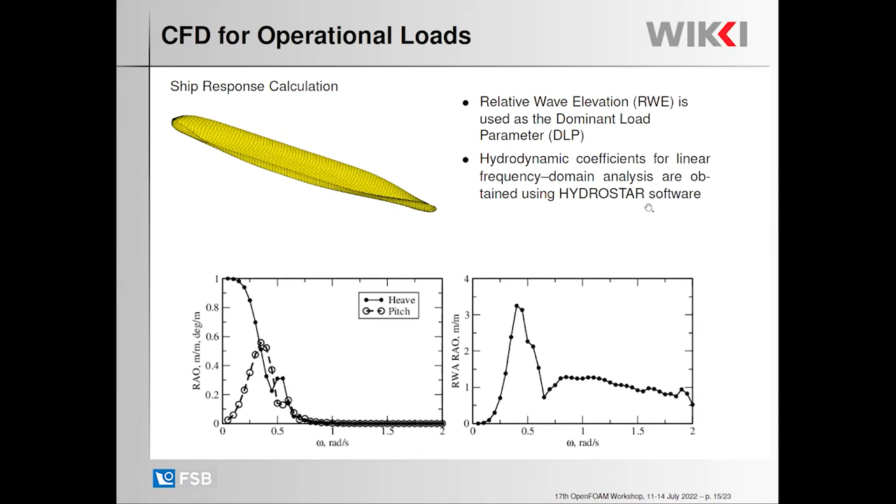We have something called the relative wave elevation, which is the dominant load parameter. Basically, your ship is going to pitch in the waves, and the waves that worry you are the ones where the water comes on deck. Based on that, we can calculate the hydrodynamic coefficients, but not with CFD, because you have to do so many simulations that we use potential flow software like Hydrostar from Bureau Veritas.

After that, from the loading condition, we have to pick a wave, and there are two criteria. The first is called the regular equivalent design wave, which says find out where the loading is worst, then create regular waves to hit that ship and carry it in order to calculate the loading. That's sort of okay, because doing a ship in regular waves is much easier than in irregular waves. But I have this problem of resonance, because if I hit it with a regular wave train, the ship is going to respond in a certain way.

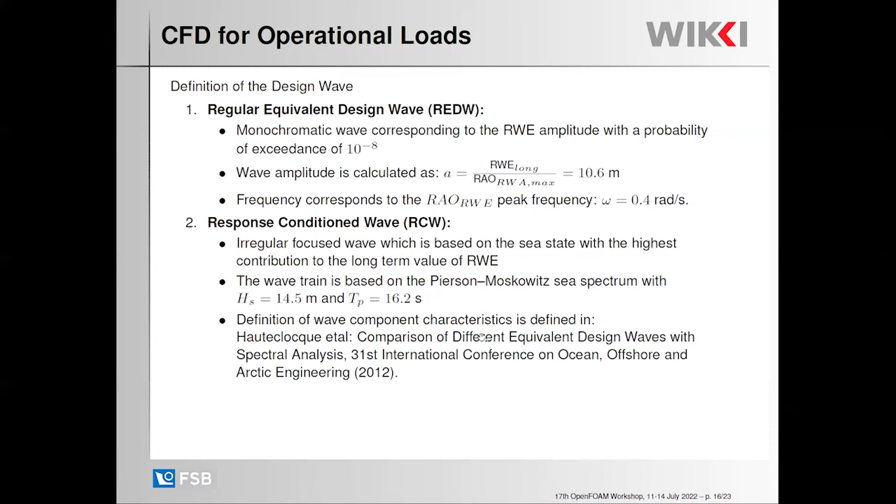The other criterion says you're not allowed to have regular waves. You have to have an irregular wave packet, which is representative of the loading. That's called the response conditioned wave, and again it's got a bunch of conditions. So what you do is go through the definition of the design wave from the wave encounter period and the wave height, and you have to find out which one is important.

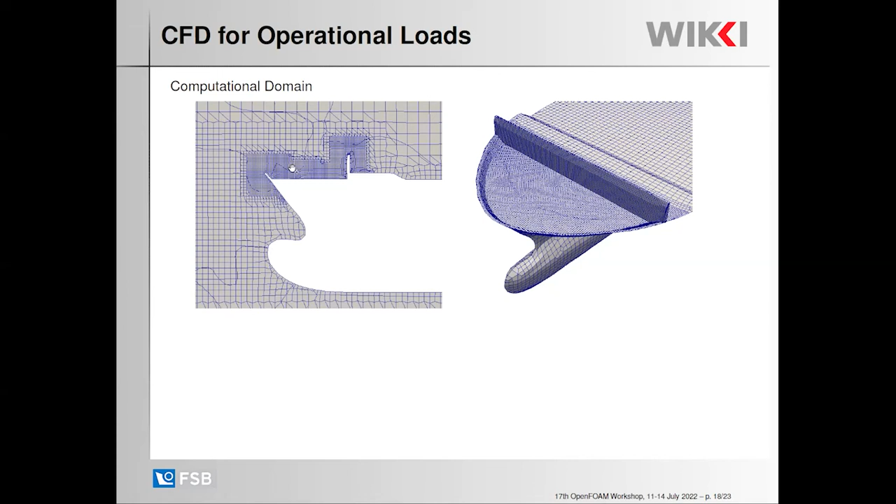Again, this is not trivial, because we are trying to dimension this breakwater. The water line is going to be down here. The amount of water that we are going to get on deck is going to be relatively small. In fact, it is so small that we have to use special numerics, geometric VOF, isoadvector, in order to capture the interface in the impact region.

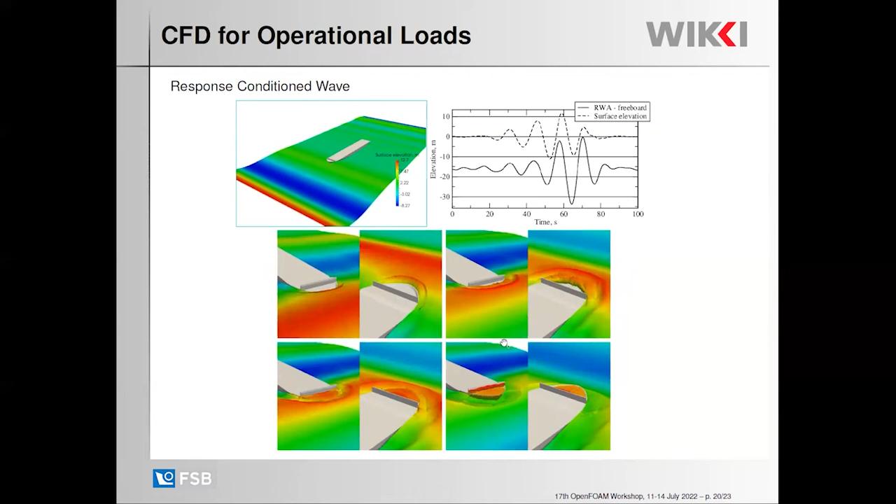Guess what? The difference in the maximum force is more than 50%. So which one do I use to dimension things? And also notice that this is a 400-meter beast that needs to live for 30 years.

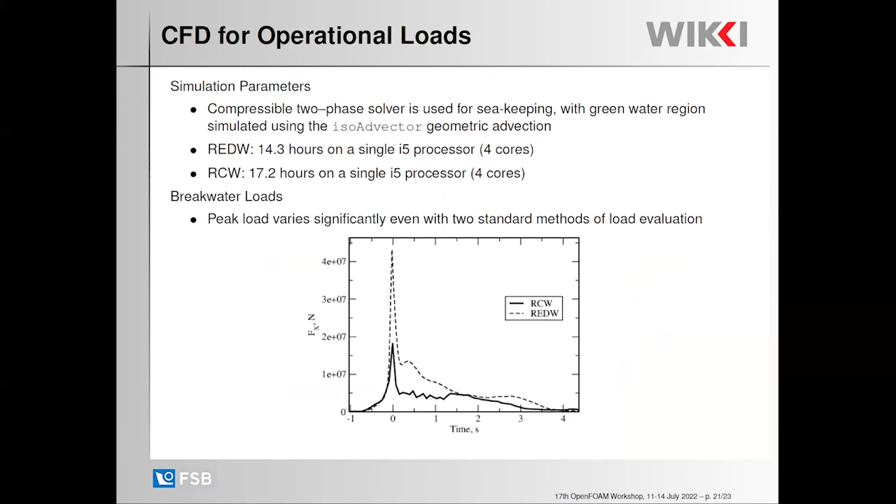So in spite of the fact that we have all of these tools that are designed by experience, very much along the line of ISO 15016, I think we have a very, very long way to go before we can use CFD for predictive dimensioning of the forces and structural response.

Well, what's the good news? The good news is that today, without CFD, we can do even less. This ship, most of them are safely sailing the seas, and the combination of new tools actually gives us hope that we can do better in ship weight, operating conditions, and all the other things. My fundamental doubt of which waves I should study in order to get deterministic data to dimension the ship is still there, and I leave that question hanging in the air.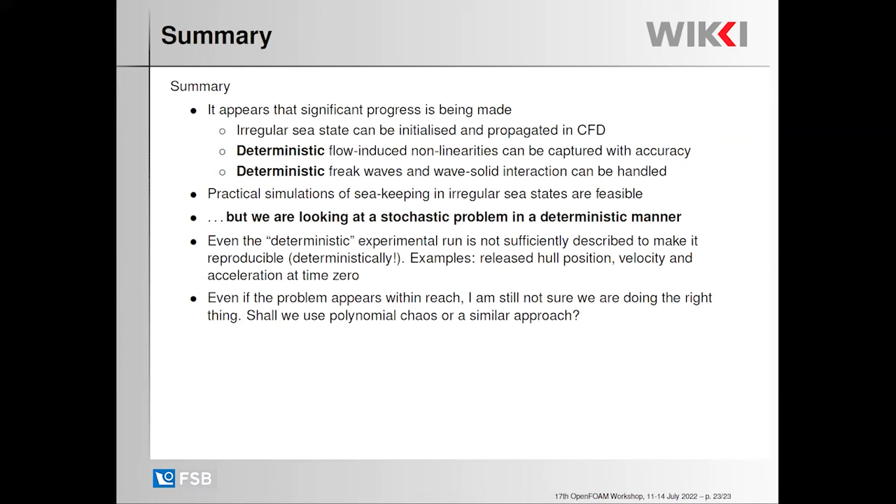Thank you for a great presentation, Professor Jasak. My question is, do you think it is possible to investigate each of these complex phenomena separately and then couple them together? For example, investigate the behavior of the propeller at different frequencies of the inlet wave and load, and the behavior of the energy saving device under different loading of the propeller. Then we say if the propeller behaves differently, we expect the energy saving device to behave a certain way, so we only focus on this specific area. Or do you think we should do the simulation containing all the issues together?

Okay, you asked me a hard question, so I'm going to give you a nasty answer. I am a poor old CFD specialist who started doing this 15 years ago, saying how hard can it get? And the answer is, it can get really, really hard. So from the point of view of a CFD practitioner, I would allow you to do either each element of the system separately, or the entire system with the rotating propeller, energy-saving device, wave, slamming, sloshing, and other effects. The closest equivalent I have for you is the ability of CFD to simulate a gas turbine. In fact, we can simulate the entire gas turbine, but nobody does it.

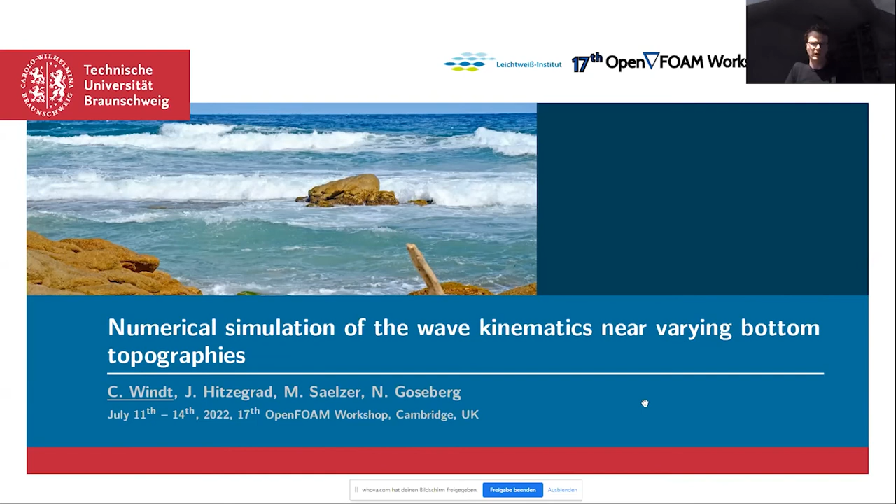This is more of a teaser of hopefully a lot of work which will be coming in the next couple of months. The table of contents is relatively straightforward: I will kick off with an introduction, then talk about the experimental reference data we used, then dive into the numerical model, the results and discussion, and then future work and conclusions.

So, introduction - no ships in this presentation, but we are sticking to the coastal or offshore world. What we want to simulate are oyster reefs.

But the Wadden Sea has, for the last couple of years, maybe the last decade, been undergoing quite significant changes due to what I've called the invasion of the Pacific oyster - invasion might be a little negatively connotated, which is maybe not quite right. Historically we had the blue mussel residing in the Wadden Sea, but now, due to climate change, the Pacific oyster is also settling there.

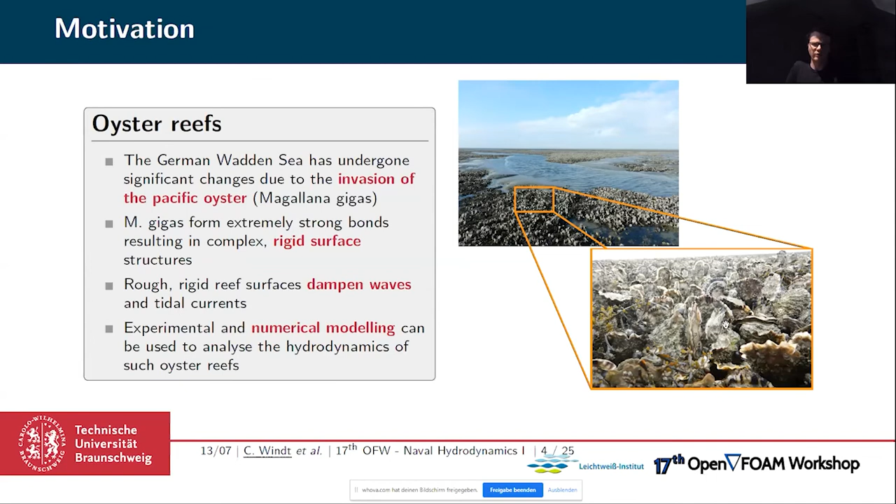What you can see here, in the picture on the bottom right, and a blow-up of this, is that compared to, for example, a smooth sand surface, these oyster reefs form extremely strong bonds and very rigid, rough surfaces. We heard about rough surfaces in the very first presentation, but maybe this is a different scale here. What happens because of these rough surfaces is that waves are dampened out.

So now a question in one of our research projects is what is driving this damping of the wave. We want to understand the hydrodynamics around these oyster reefs, doing both experimental and numerical modeling. In this presentation I will be focusing on the numerical modeling aspects of this whole project.

The objective of this work is to develop a numerical model for the analysis of the wave kinematics around such ultra-rough, bio-encrusted surfaces, and really then move on to understanding the potential to use such ultra-rough surfaces for nature-based coastal protection measures.

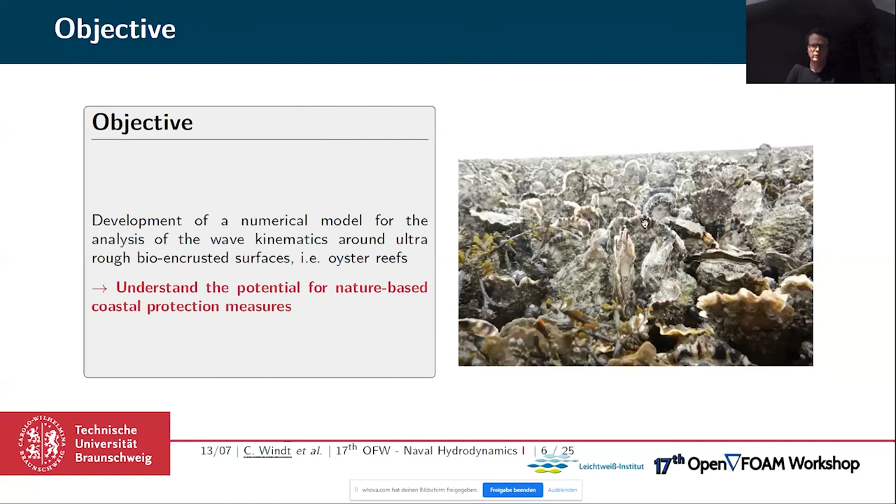So basically answering the question of whether it makes sense to plant oyster reefs at certain locations to help or support coastal protection. With this motivation, we looked at how to model oyster reefs.

What's missing here, and this will be mostly part of future work, is the arrow back from the numerical representation to the actual field data - moving away from the simplified surrogate to more realistic representations of the rough surface in the numerical model. Currently we are at this stage where we take the surrogate and want to build this numerical representation of that surrogate.

So talking about the surrogate, let's talk about the experimental reference model or reference data that we used for this work.

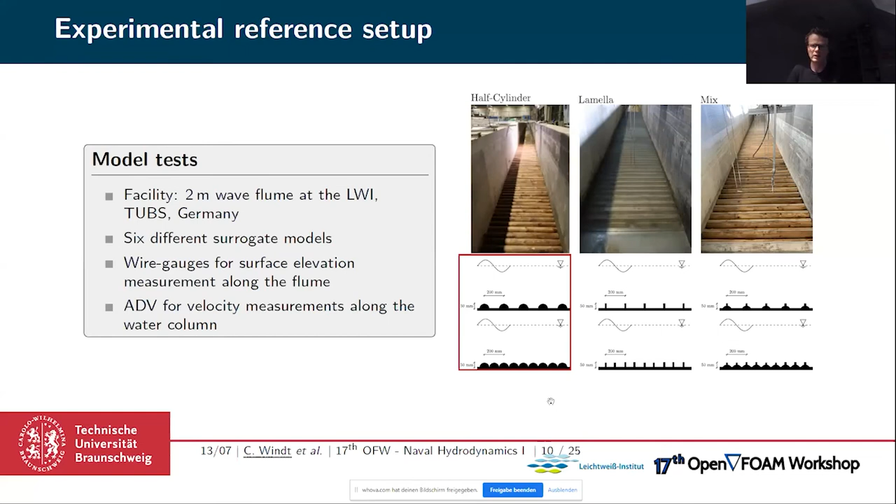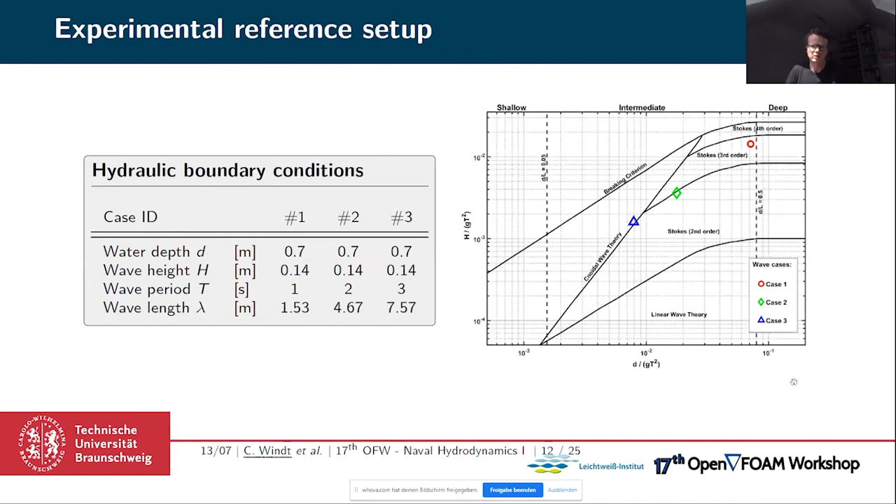So representative cases, really. Okay, moving on to the numerical model - nothing too crazy, to be honest. We use OpenFOAM, version 2012, with Interfoam for the multi-phase problem. Wave generation is done with IHFoam, which I guess you're all very well familiar with.

One little note here: for wave absorption we used a numerical beach - I've put the reference down here. You can see in the equation it's basically a damping factor added to the momentum equation. In this paper we actually showed that it performs very nicely, which is why we used it here.

Interface capturing is regular volume of fluid with MULES, so no isoAdvector or anything like that - very standard. As for flow conditions, we started off this study considering laminar flow conditions, and in future work we might want to extend that to include turbulence modeling too. But yeah, nothing too special here, to be honest.

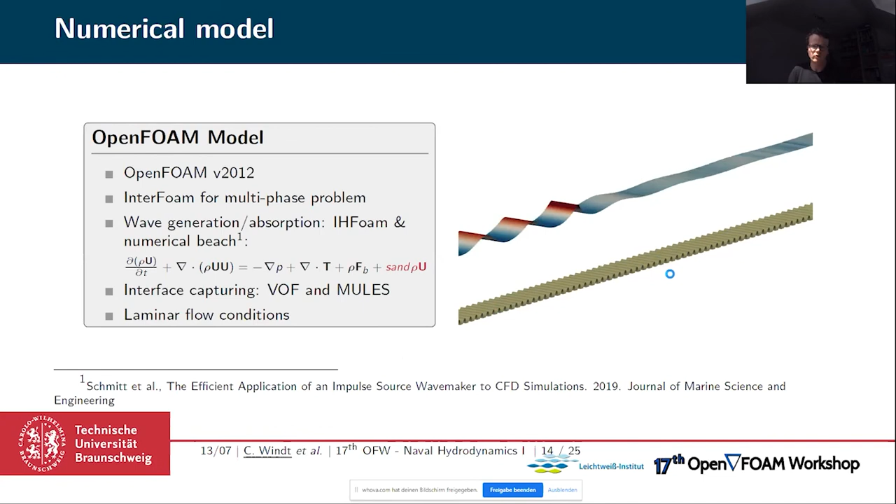On the right-hand side, I must say the case we considered is a 2D case, and this representation is just stretched so it's easier to visualize what's happening. Here on the bottom, you can see this representation of these half cylinders from the experimental setup.

Right, so just a few numbers regarding the computational domain. The total length of the area where the surrogate models of the oysters sit is similar to the one in the experiment. Water depth is also similar to the experiments, and the rest of the domain has been adjusted slightly to save computational time, or more so grid size, to save computational time. That's why it doesn't cover the whole length of our experimental test facility.

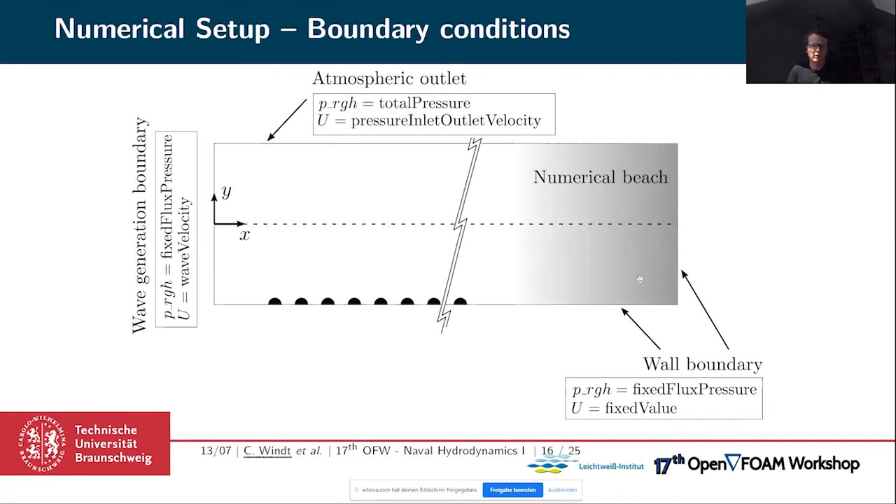The numerical beach spreads over 2 wavelengths, so 16 meters, to get good absorption quality of the waves. Boundary conditions are nothing too special. Waves are generated at the left-hand side here, and then we have the wall boundary condition at the bottom and at the end wall, and then the numerical beach to absorb the waves.

For the grid, we performed convergence studies on the grid size and time step, and got relative grid uncertainties of less than 2.2%. The overall cell size in this interface region used 20 cells per wave height. I suppose using maybe isoAdvector, this could be reduced a bit, but this works for us pretty well. We also used a body-fitted grid around the half cylinders.

Moving on to results and discussion, for the sake of time. First off, we looked at the transmission coefficient. With the experimental surface elevation time trace and the numerical surface elevation time trace, we did some phase averaging and then computed the transmission coefficient. On the right-hand side you can see the transmission coefficient for the flat surface and the half cylinder, or rough, surface. We did include the reference case here.

These are the results for the 1 second wave, the 2 second period wave, and the 3 second period wave. For the flat bottom, we get pretty good agreement between experiments and numerics. For the half cylinders, depending on the period, we get bigger or smaller deviations, with a maximum deviation of around 12%, which is still okay. There is some potential to improve this, but generally, for what this is, we were relatively happy with those results.

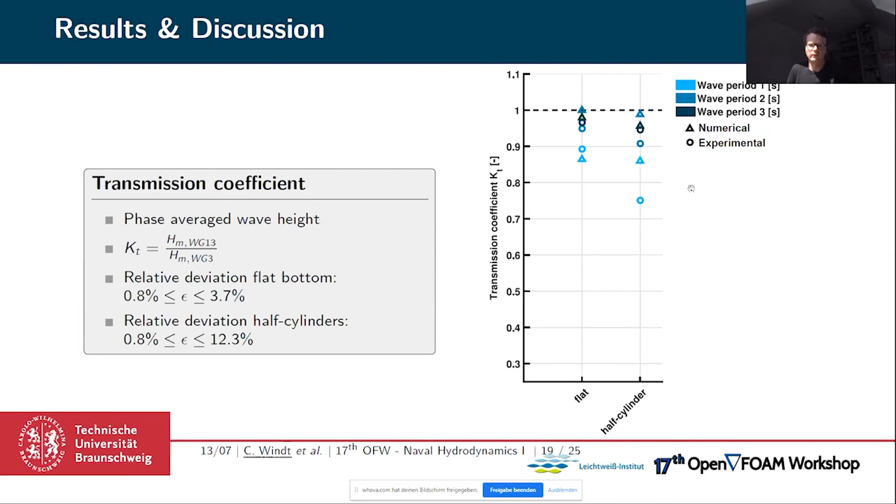If I flick to the next slide, you can see it changes for the rough bottom topography. Apologies for the lack of data here at the bottom, but that's what happens when you work with physical experiments — something went wrong with the data there. Quickly flicking back and forth, we can see that the change in free surface elevation is significant. But moving from the smooth surface to the rough surface, there's quite an increase in the velocity magnitude. Most importantly, qualitatively we get quite good agreement between the numerical model and our physical results.

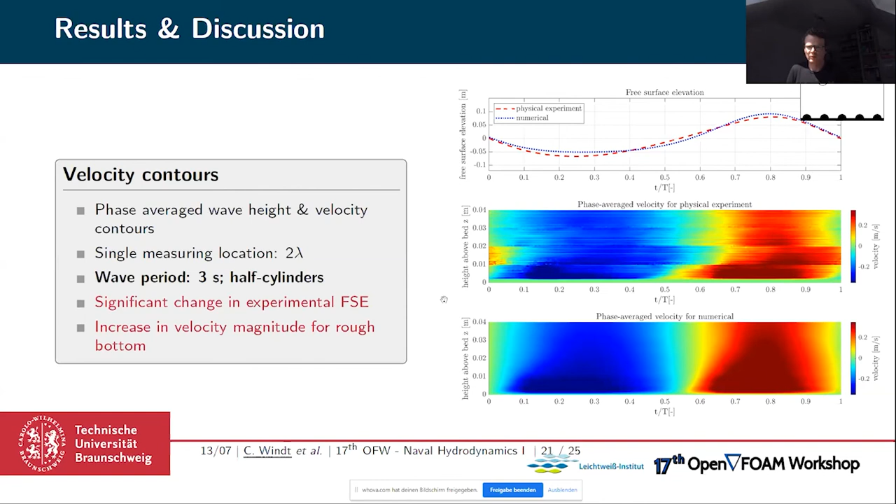So that's maybe a good segue to quickly move on to conclusions and future work.

So conclusions. Obviously this is a first step towards modeling the wave kinematics near rough bottom topographies. I guess you all agree that our surrogate with half cylinders is a very simplified model of what you've seen in the first slide, the actual oyster reef. But as said, this is a first step, so it encourages us to continue our work.

We get relatively good agreement in terms of transmission coefficient, less than 12.5%, which is sufficient for what the model is right now. But then we do see some artifacts in the free surface elevation, especially for this 3-second wave, which we might have to investigate.

But most importantly, and this is really what I want to tease you with, is that we do want to extend our model to include these sharp lamellas, because as you probably guessed, those have the more significant influence on the velocity profiles and the wave attenuation in our experiments.

And this is really exciting, and I hope we will make some good progress there: we also want to extend our model towards modeling an actual oyster. So we want to take 3D scans of an actual single oyster, and potentially also an oyster reef, and put that into our OpenFOAM model to really get a better understanding of the actual hydrodynamics in the field, rather than comparing to models as we are doing right now.

So what we do have, as PIV was mentioned earlier, is on site now a PTV measurement device, particle tracking velocimetry, which enables us to measure velocities in a volume. It's basically a shoebox-size volume which we can measure, and there the frequency is really high. I don't know the number off the top of my head, but compared to regular PIV, our measuring frequency is higher. So that might enable us to look more into turbulent effects happening in the marine, coastal, offshore environment. I'm not quite sure if that's a sufficient answer to your question.

Thank you, it's enough for the moment. So the second question is related to the oysters themselves. From what I can see from numerical and experimental data, they actually help because they increase the dissipation of wave energy. Exactly.

I wanted to ask you if they are edible as well. Very good question. I think the ones in the Wadden Sea I wouldn't eat, because of their filter action, I think whatever they filter out of the ocean might not be good for your health. But quite technically, I think you can eat them, but you may be better off using ones from aquaculture rather than the field.

In that case, Christian, you can grow some in your wave tank and we'll come and visit you. Thank you very much, are there any other questions?